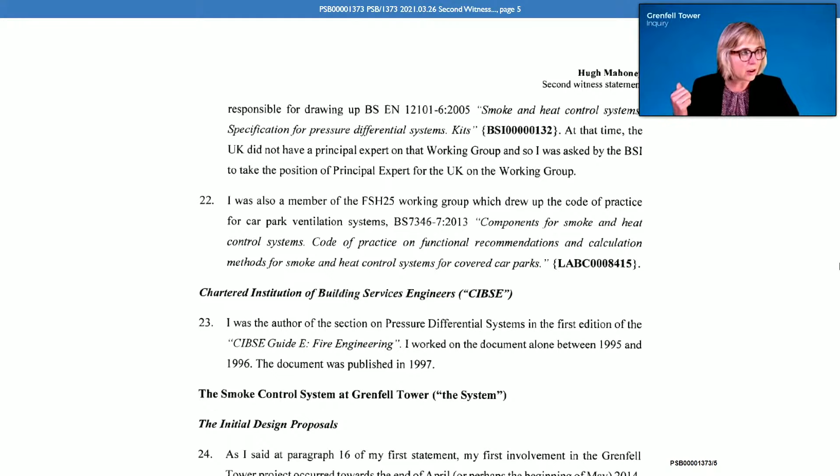Were you also familiar with the practical guidance set out in Approved Document B on fire safety, insofar as that was relevant to smoke control? Yes. Thank you. Now, if we go to paragraph 9 of this second witness statement, this is on page 2, you tell us a little bit more about the Smoke Control Association.

You tell us that the Smoke Control Association was established in 1987. It's part of the Federation of Environmental Trade Associations. It was originally called the Smoke Ventilation Association. The SCA has members from a range of organisations involved in the manufacture, design, supply and fitting of smoke control systems and equipment. The organisation is run via several committees, each carrying out a specific function.

And is it right that you were part of the SCA from 1992 until you began your employment with Colt in March 2016? That's correct. And as a trade association, is it correct that the Smoke Control Association is effectively a group run by the industry, bringing together those with experience in smoke control systems from the industry? That's correct.

And you also tell us that you were chairman of that Smoke Control Association from 1998 to 2000, and you continued to have an active role after that. To what extent did your work as chairman relate to the design of smoke control systems for residential high-rise buildings? That came later. So when did that work with the Smoke Control Association begin? I can't remember exactly, probably about 2009, somewhere around there.

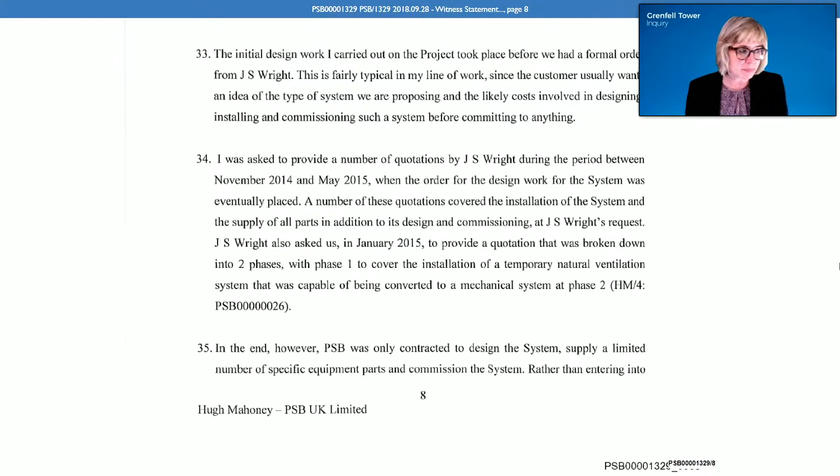You say this, you say, in the end, however, PSB was only contracted to design the system, supply a limited number of specific equipment parts and commission the system, rather than entering into one overall subcontract. J.S. Wright ended up placing a series of separate orders, starting with the order to carry out the design work that was placed in May 2015. PSB was not contracted to install the system. I understand that the installation was instead carried out by a company called RJ Electrics, which is a subcontractor of J.S. Wright. And we were not, in the end, asked to perform our works in phases.

So that's the explanation you give as to how you ended up being asked to carry out the design work, yes? Yeah, but that design work actually is the expansion of the design written down in the performance specification to a working system, not design as in what you think it means.

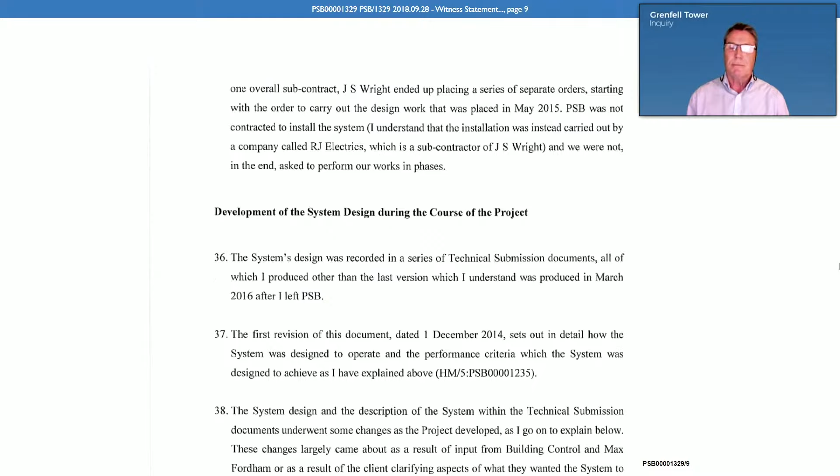Well, I don't know whether you know what's in my head, Mr. Mahoney, but what do you think I think it means, the design work? You're starting at the very beginning with a blank piece of paper and designing a system. I see. So you're saying you didn't do that. It is what you're saying, that you took the design intent that was set out by Max Fordham in the employer's requirements and develop that design?

I'll go back to a statement I made earlier. The design that we had proposed was not carried forward. What happened was that Max Fordham reviewed the information that we provided them with to say you couldn't install a compliant system. It was impossible. That therefore, in order to find a solution which adhered to the spirit of the guidances, not compliant, we put forward a suggestion of a system. That was not taken up. What they then did was to take the volumetric flow rate that we had specified and put it forward as an improvement to the existing system. And that was how the project went forward.

It was on developing an improvement, not a design. And they did a document that they sent through for approval by Building Control, who approved the betterment. Right, I see. Well, look, we're going to come to the specific documents that you prepared in due course, but I think I understand your answer at this stage.

Just going back to what you said in that paragraph that I just read out about the fact that it was a company called RJ Electrics that would be installing the system. In your experience, was it typical that PSB would be asked to design but not install a smoke control system? Not typical, but not uncommon.

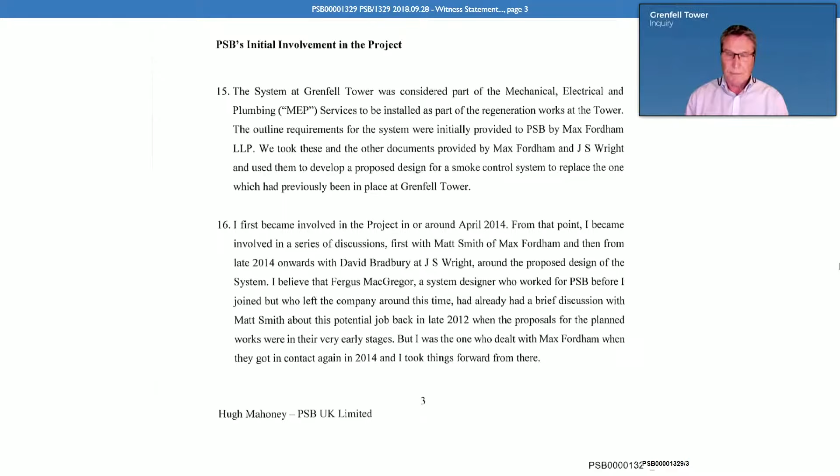Can you explain why the project was assigned to you rather than Mr. MacGregor from 2014 onwards? On the day of the phone call, Mr. MacGregor was not in the office and I took the phone call. I see. So simply because you'd taken the call in 2014, you then carried on with the dealings with it, yes?

Yeah. Were you provided with any update from Mr. MacGregor or Max Fordham about the previous discussions that they'd had about the project? An update. Yes. Did you, when you got off the phone to Max Fordham, speak to Mr. MacGregor and say, what have you already been discussing with them previously? Yes, when he was next in the office, we got together and I asked him to go through with me what he'd been talking about.

And at that stage, it was just, again, another telephone conversation with information taken down over the phone and no real detail. Is it right to say that the previous discussions between Mr. MacGregor and Max Fordham had been more than just a brief discussion about a potential job, and involved some preliminary design advice being provided by Mr. MacGregor? Not directly, no. It was a case of he had a phone call.

He was told how many floors there were, and he was asked what kind of system could be put forward. He was told what was already there. So he decided push-pull was a better solution because of the extended travel distances within the lobby area, and decided that was the best system put forward. But he was not given the employer's requirements at that stage, which added the restrictions that meant you couldn't use that system. I see. Well, let's just look at an email from Mr. MacGregor.

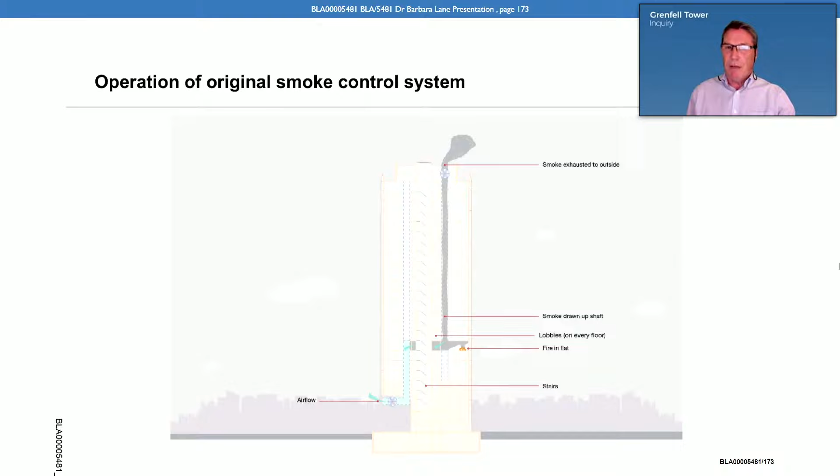And is it right that the primary intention was that it would be drawn up naturally, but that there was a fan that could be used by the fire brigade as a boost to mechanically support that movement of smoke, yes? Yes, as we understood it, it was a natural ventilation system with no fans operating when the detection went off. When the fire brigade arrived at its point of intervention, they had the facility to turn a manual switch that would bring a fan into operation if they deemed it necessary. Yes, thank you, that's helpful.

Did you know how old the existing system was in the tower? We were told it was an early 70s built building. So you assume the system was also early 70s, yes? Yes, because the actual shafts were part of the construction of the building. And was that system working when you first visited the tower? No. So you weren't able to see it in operation in any way? No.

Did you ever consider whether the existing system was compliant with the standards in force at the time it was installed? No. Did you ever ask yourself what the original requirements might have been for that system? Yes. And what conclusion did you draw? Well, it was very difficult because I've never seen anything that small that was compliant with any standard.

So to me, it was some hybrid design that someone had carried out, and there was no detail of it. There was no information available on file anywhere, as far as I can gather, because we did ask the question, and no one was able to trace the design aspect of that particular system of what it was supposed to fulfill, because in modern standards, it wouldn't fulfill anything.

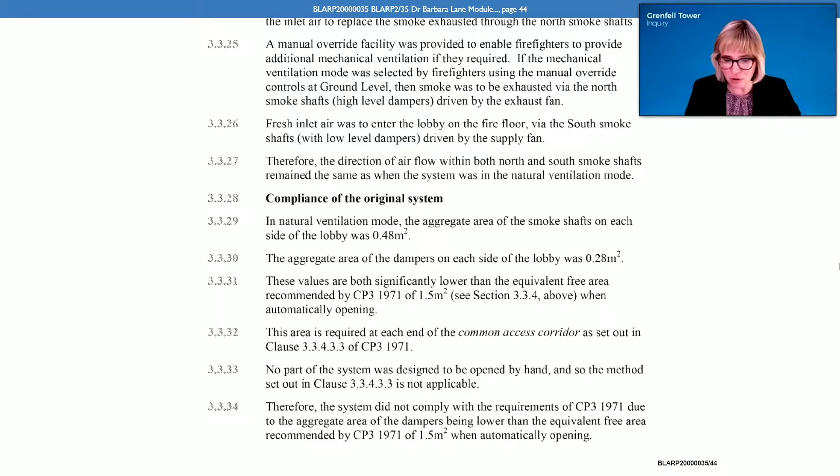Did you ever ask yourself what level of performance the existing system would have if working properly? I took a view on that - the most efficient aspect would be with the fan operating, pulling. It was obvious from the construction, being a bifurcated fan, it would have limited volumetric flow rate. Given the diameter of the fan and the size of the ducts, you could evaluate fairly accurately the likely volume flow rate. Did you produce any written analysis of what the existing system was capable of? No, that wasn't in my brief.

Would the existing system have provided protection to the stair when working properly? No. Why? Because there wouldn't be sufficient ventilation rate. Would it have provided protection within the lobby it activated on? No. So you thought it wouldn't provide any protection to the stair or lobby? I wouldn't say any, it wouldn't provide satisfactory protection. Which of those two was it intended to protect? I would say the lobby.

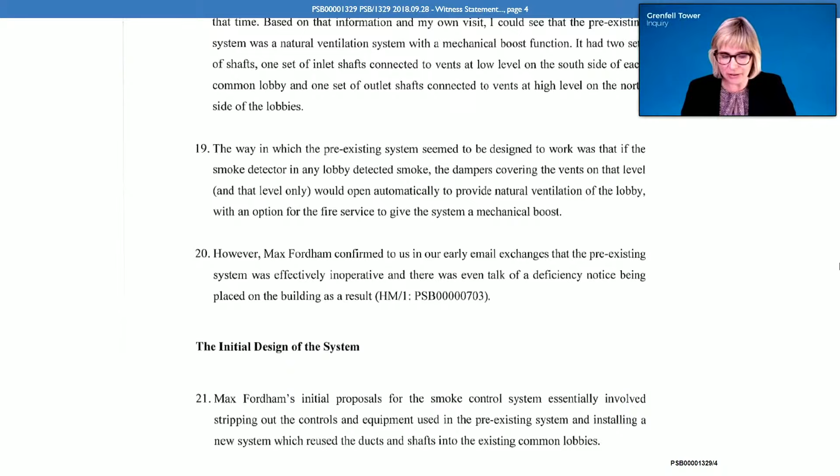Was PSB ever sent a copy of that deficiency notice? No, because we weren't involved in the project. Did the fact of that deficiency notice affect the advice PSB gave about the design of the system in any way? No. Were you aware there had been a fire at Grenfell Tower in April 2010 in which the existing smoke control automatic opening vents had failed to operate? No. So you were never aware smoke had leaked from the extraction shafts into other floors? No. Had you known that, would it have affected the design advice you gave about improving the existing system? Only in so much as to tell them they should have been maintaining it and making sure it operated correctly. Other than that, no.

Now, stepping back and thinking about the regulatory requirements which apply to the design of the refurbished smoke control system at Grenfell Tower, can you explain which of the functional requirements in Schedule 1 of the building regulations you considered when designing the system?

I don't think there's a straight answer to this. As I've already said, you could not put forward any system that would comply with any of the guidance. It was impossible, so there was no system type you could put in there. So therefore, we as designers looked at it from a different direction and said, well, the spirit of the standard is to protect the stair. Can we come up with an alternative design that will protect the stair that doesn't comply with anything? That was our starting point.

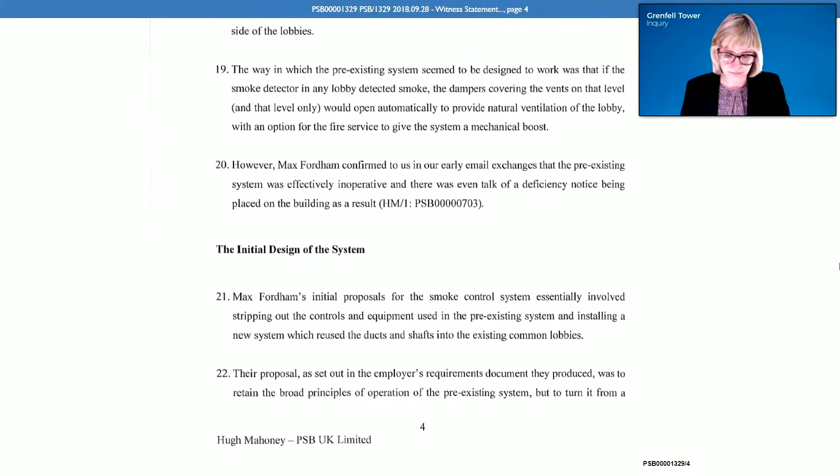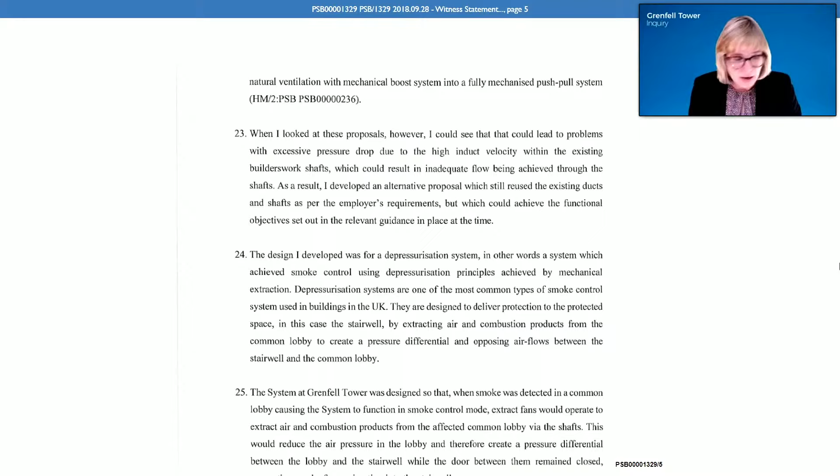And you say their proposal, as set out in their employer's requirements document, was to retain the broad principles of operation of the pre-existing system, but to turn it from a natural ventilation with mechanical boost system into a fully mechanized push-pull system. We've already discussed what those two concepts meant—natural ventilation with mechanical boost. Just to be clear, what do you mean by a fully mechanized push-pull system? When it operated automatically.

So you'd still be having inlet air through the south shaft and up into the lobby and extract coming out through the north, but this time with mechanical assistance from the outset? Yes, and it would operate automatically on detection rather than manually by the fire brigade. Yes, I understand. Now, if we can go to paragraph 27 of your second witness statement on page 5.

You say this: the push-pull system proposed by Max Fordham is a type of smoke control system usually employed when the travel distance in the escape corridor leading to the stairwell is greater than that specified in ADB or BS 9991. Such systems are designed to provide smoke dilution on the escape route, reducing the levels of smoke toxicity and visibility to acceptable levels. This is achieved by introducing clean, fresh air through a mechanical inlet air shaft at low level, local to the stair door within the corridor. An extract shaft is located at the furthest end of the corridor, extracting diluted air smoke at a volumetric rate equivalent to the fresh air inlet.

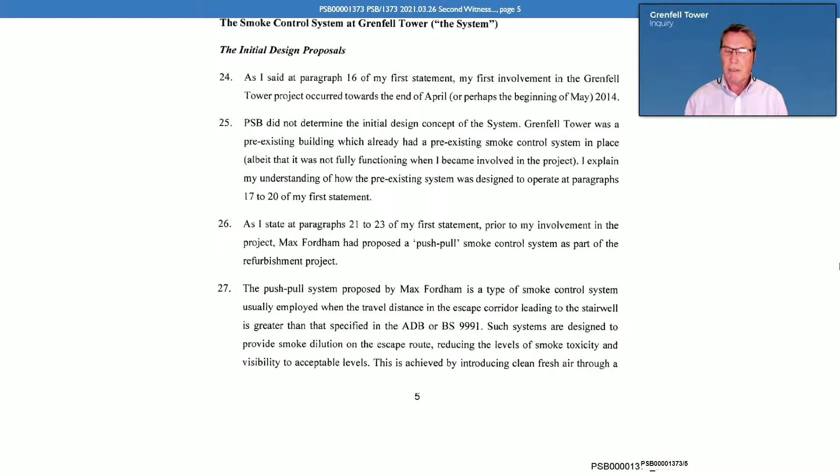Were you aware that the maximum travel distance in the lobbies at Grenfell Tower exceeded the 7.5 metre threshold for an extended travel distance specified in Approved Document B on fire safety? By measuring 9.5, yes. And we've seen this before with another witness, but just for the transcript, table 1 of Approved Document B makes clear that the maximum travel distance in common areas of blocks of flats is 7.5 metres. And can we also agree that the maximum travel distance in BS 9991, which you mentioned in your statement, is also 7.5 metres. And after that, it's considered to be an extended travel distance.

Correct. Let's just briefly look at that. It's BSI00000621. Yes, this is BS 9991 2011, Fire Safety in the Design, Management and Use of Residential Buildings, Code of Practice. And if we look at figure 6 on page 36, and at the bottom, you can see the 7.5 metres is shown in that bottom diagram. Do you see that? Yes.

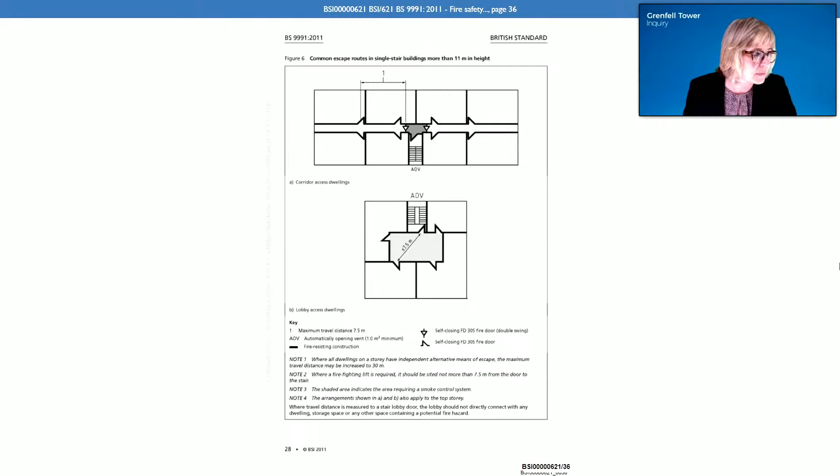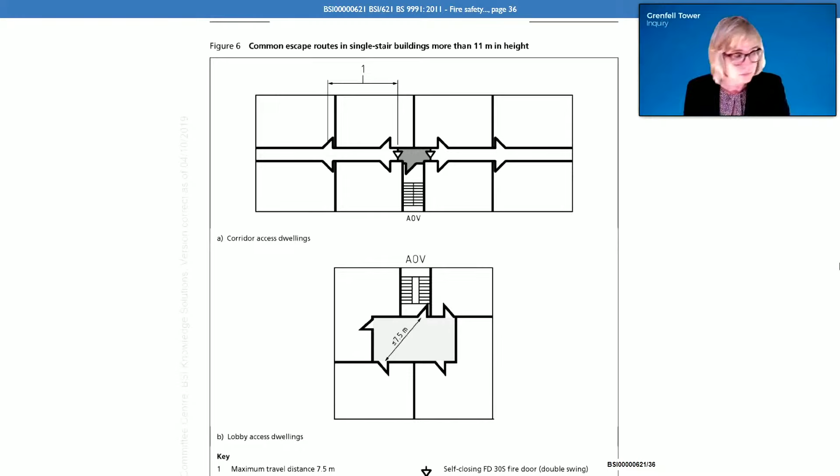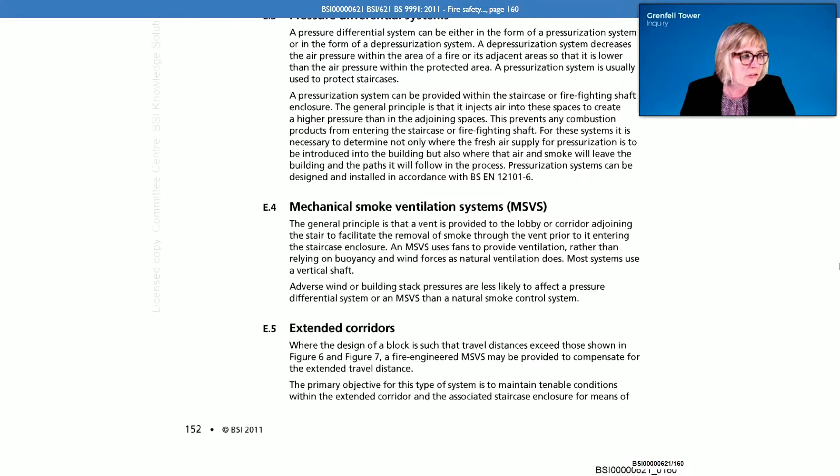And it makes clear, for example, if we look at page 160, right at the bottom of that page under extended corridors, it says where the design of a block is such that the travel distances exceed those shown in figure 6 and figure 7, a fire engineered mechanical smoke ventilation system, MSVS, may be provided to compensate for the extended travel distance. The primary objective for this type of system is to maintain tenable conditions within the extended corridor and the associated staircase enclosure for means of escape purposes. And then information about tenability criteria can be found, and it gives the reference.

So for the purposes of BS 9991, anything above 7.5 metres is extended, and that guidance we can see is provided about needing to maintain tenable conditions in the corridor and the stairs.

Now, just to be clear, the BRE in their report following their survey at the tower, measured the same distance at 9.3, so slightly less than that. And you've said you thought it was around 9.5 at the worst part, is that right? Correct. But whether it's 9.3, 9.5 or 10.3, that was an extended travel distance, wasn't it, compared with the 7.5 maximum in ADB and BS 9991?

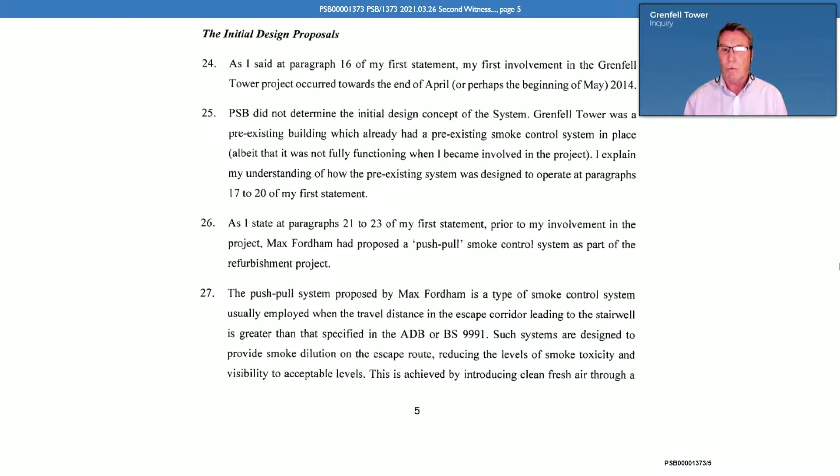I see. So you're saying you were fully aware that there were extended travel distances at the time you were carrying out your design work, yes? That's correct. Thank you. Now, if we go to paragraph 23 of your first witness statement now, page 5.

Now, in this paragraph and some that follow, you are explaining your concerns about the Max Fordham proposal for a push-pull system. You say, when I looked at these proposals, I could see that could lead to problems with excessive pressure drop due to the high in-duct velocity within the existing builder's work shafts, which could result in inadequate flow being achieved through the shafts. As a result, I developed an alternative proposal which still reused the existing ducts and shafts as per the employer's requirements, but which could achieve the functional objectives set out in the relevant guidance in place at the time.

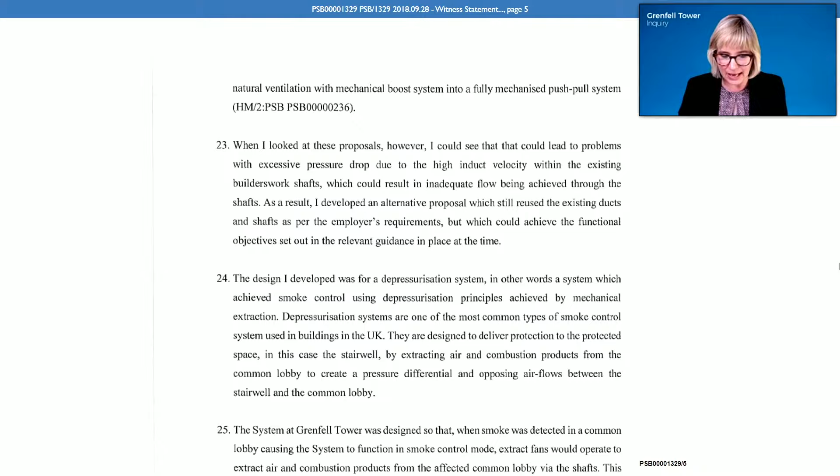Now just taking that explanation in stages, firstly, can you explain to us why would air entering the existing builder's shafts potentially quickly result in an excessive drop in pressure? Not drop, an increase.

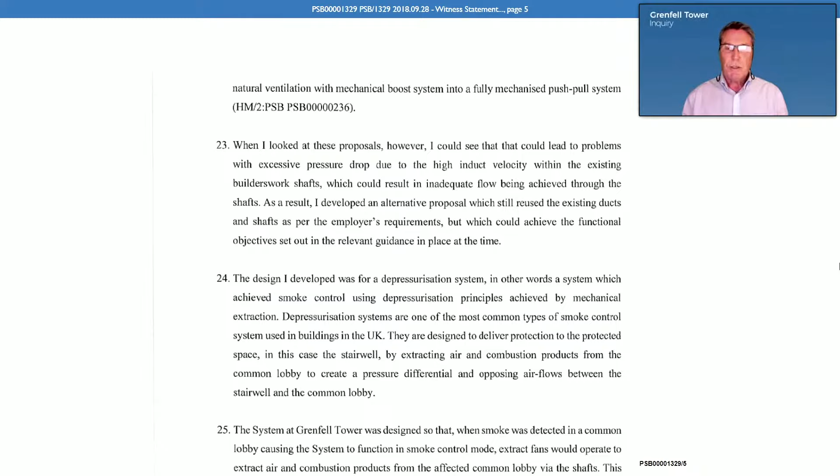Can you explain your concern then? It's a bit like the old quart into a pint pot. You're trying to push too much air through a small hole, and it would lead to large pressure drops within the system, which are difficult to keep a balance of. In addition, the wall openings into the lobby would have velocity jets somewhere in the region of 20 to 25 meters a second, which if there was a fire in an apartment in, say, the south end of the building, then when the fire brigade were fighting a fire, that jet would probably push smoke into the stairwell. So we could not maintain the stairwell clear of smoke. The push-pull system was just impossible to put into work in situ because of the restrictions of size.

Yes, I see. So just to be absolutely clear, you say, first of all, it's a bit like the old quart into a pint pot. You're trying to push too much air through a small hole, and it would lead to large pressure drops within the system, which are difficult to keep a balance of. Can you just explain how that process occurs?

Well, as you're trying to force a large volume of air through a small duct, it just increases the pressure drop within that shaft. All performance characteristics for ventilation in ducts is based upon laminar flow, not turbulent flow, and on reasonable velocities, not high velocities. These would be high velocities. That would lead to excess pressure differentials, pressure drops, beyond what we would normally work to. We would normally work about 8 meters a second in duct maximum velocity, and this was far in excess of that. But the velocity jetting through the wall opening was also a problem. That would also create a big pressure.

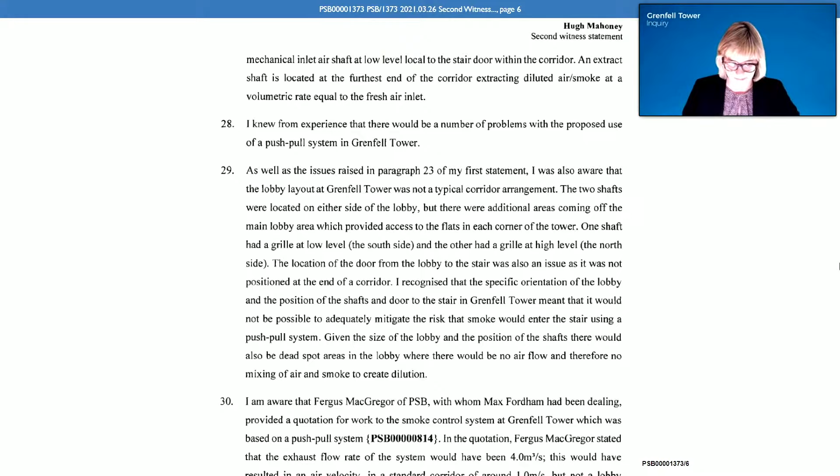Mm-hmm. It's one of your concerns that with a push-pull system, where the smoke is going across that lobby, that might not mitigate the risk that smoke would enter the stair, yes? Yes. And you've also expressed concern that there might be dead spots in the system at the branches of the lobby where there would be no airflow.

The principle of a push-pull system is usually air flowing through a straight tube, i.e. a corridor. It travels through that straight tube with a velocity, and it mixes air with smoke as it travels, and it reduces the level of toxicity and obscuration within that corridor because it's mixing and pulling out.

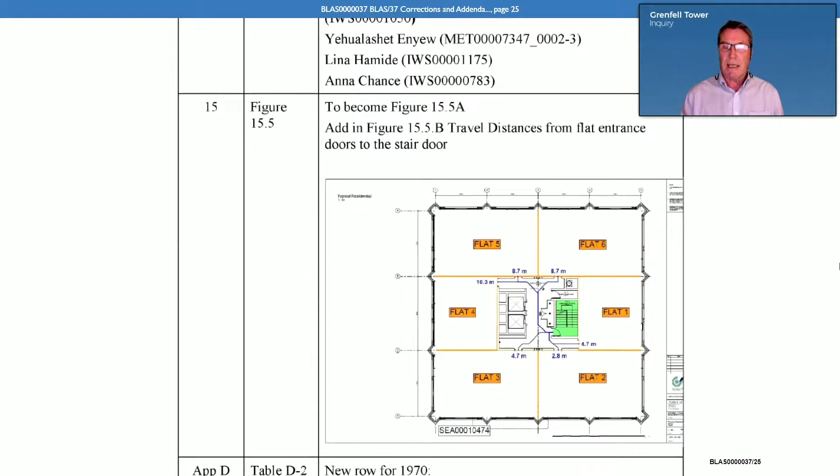The main concern I had throughout any of the system types was the size of the shafts. But are you talking specifically about push-pull? Yes. Is it fair to say those are the main concerns? They are the main concerns. One, we couldn't guarantee not contaminating the stair. We could not guarantee that. And we could not use a push-pull system in the normal sense, i.e. a straight corridor. Yes, I understand.

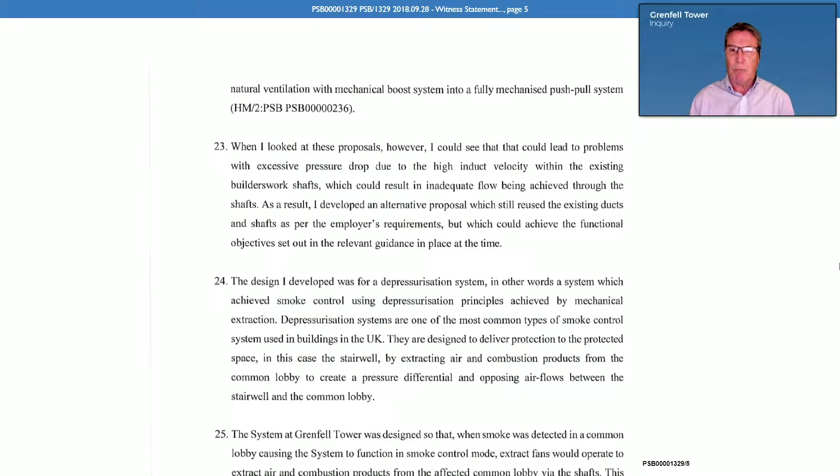And just to be absolutely clear about what you thought those functional objectives were. So in terms of the stair, what were your functional objectives? To keep it relatively clear of smoke. When you say relatively clear of smoke, that's the wording from the standards. Which standards are you referring to there? I think that's in BS 9991 and ADB. So you're keeping the stair relatively clear of smoke.

What about the lobby? To put ventilation in there that will deal with some smoke which may enter the lobby when people are escaping from their flat, from the fire apartment, sorry. And again, where are you getting that requirement from, some smoke which may enter the lobby? 2.25 of ADB.

2.25 of ADB, yes. And did it include protection of the stair for firefighting operations? Yes, I've already said that. And protection of the lobby for firefighting operations? Yes.

Were those functional objectives - so what you've just said, that we're trying to keep the stair relatively clear of smoke, etc. - were those functional objectives ever set out by you or anyone else at PSB in a document? No, it wasn't necessary, as I said before, because the project didn't go ahead based on the design. It went forward on the betterment on the ventilation rate.

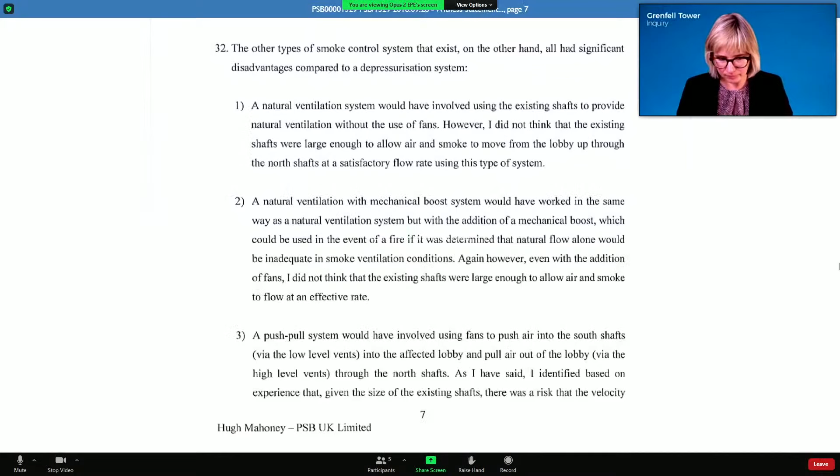Now, if we go to paragraph 32 of your first statement, page 7. In this part of your statement, you've listed a number of different types of smoke control system that can be installed in high-rise buildings. Just to quickly run through them, there's the natural ventilation system, which we've discussed.

Yes. And is it right that the main problem with Grenfell Tower was the size of the shafts, which were not large enough to achieve a high enough airflow rate? That's correct. Did you ever do a calculation to confirm that? To confirm what? The size? To confirm that the shafts were not large enough to achieve a high enough airflow rate with a natural ventilation system. Did you ever do a calculation?

It doesn't have a calculation. It's based on a size, a dimension, cross-sectional area, 1.5 square metre shaft. It's not based on a calculation. I see. So if you went to prove that system on the day of commissioning, for example, you wouldn't measure the shaft. You wouldn't do a calculation.

Right. And then we have a natural ventilation with mechanical boost. Again, we've discussed that before. Yes.

You say at paragraph 32.2, in the last sentence, however, even with the addition of fans, I did not think that the existing shafts were large enough to allow air and smoke to flow at an effective rate. Yes? Yes. What do you mean by an effective rate of airflow? To meet the design requirement.

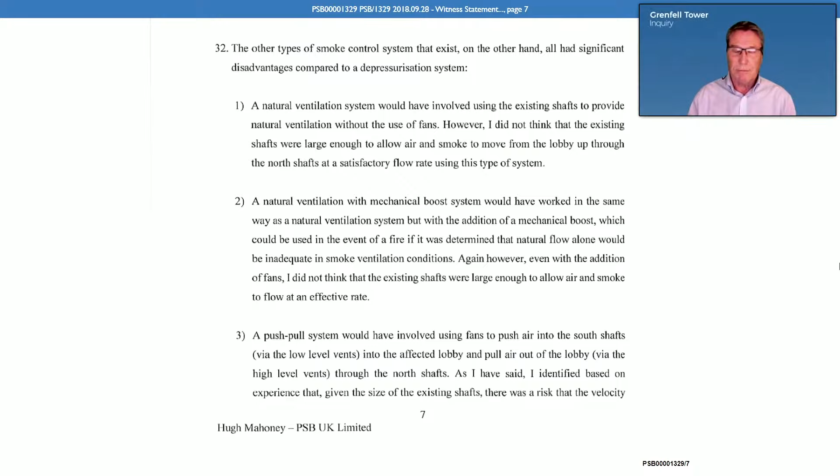And then there's the push-pull system, which we've already discussed, and you've explained your concerns about that. Yes. And then going over the page, you talk about a pressurization system, which is another type of mechanical smoke control system. A pressurization system, is this right, would use fans to move air into the stairwell itself, creating higher pressure in the stairwell, preventing smoke moving into the stairwell.

Is that right? Yes. And was the main problem with that, in your view, that it would require the stair to be well sealed so that this positive pressure was maintained? No. A pressure differential system to BS EN 12101-6 is very express in its requirements and layout, and it is impossible to install that compliance system within Grenfell Tower, or for that matter, any high-rise block of flats. You simply can't do it.

Yes, I understand that, but it's right, isn't it, that British standard refers to two types of pressure differential system, and one of them is pressurization of the stairs? Yes and no, it's far more detailed than that. You pressurize the stair, you pressurize the firefighting lobby, and you pressurize the firefighting lift, and you must have an exhaust path within each dwelling.

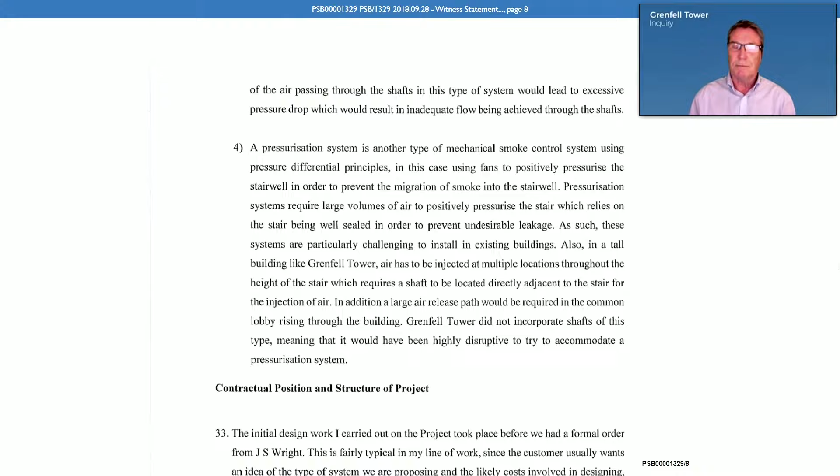Yes, I see. If we go to an email, PSB 6025, there's an email from Mr. MacGregor to you on the 2nd of May 2014.

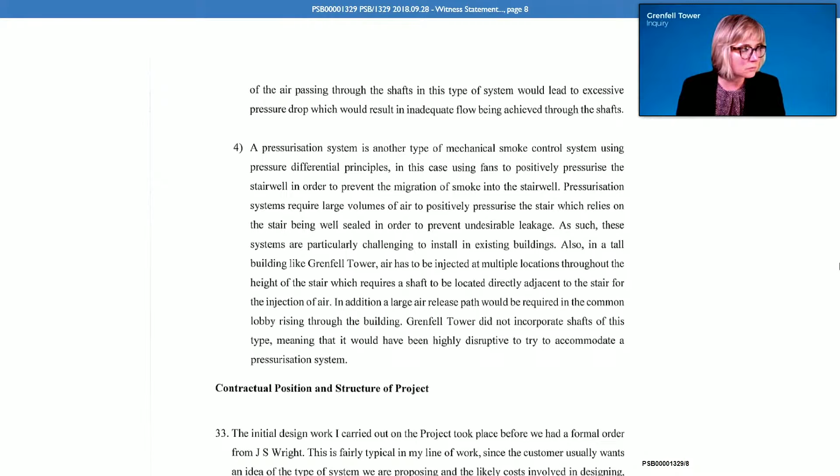He says in the first paragraph of this email, 'Hugh, this is one I looked at some time ago, and we discounted changing the system to a pressurization system as it would be much too difficult. Getting the ducts in, leakage paths would be a nightmare.' Do you recall this email? Yes. And can you help us, what pressurization system had you discounted at that stage as being too difficult?

Any pressurization system. So when he says getting the ducts in, leakage paths would be a nightmare, what specifically is he referring to in terms of getting ducts in and leakage paths? To comply with the requirements of that standard, you would have to put a large air delivery duct to serve the stair, which no slab openings are available for. You'd have to put a very large duct in to deliver the air to the lobbies, and there was no openings in the slabs to accommodate that. You'd also have to have a much smaller duct, but a duct nonetheless running through the height of the building for the firefighting lift, and the openings for that didn't exist.

And in every flat, because you didn't have two opposing walls to put automatic opening window vents in, which I'm sure the tenants wouldn't have wanted anyway, you'd have had to put a very large 1.6 square metre minimum cross-sectional area duct in every flat running through the building. So if they've got 6 flats per floor, that's 6 very large ducts running through the height of the building. They just did not exist, so therefore you couldn't put it in.

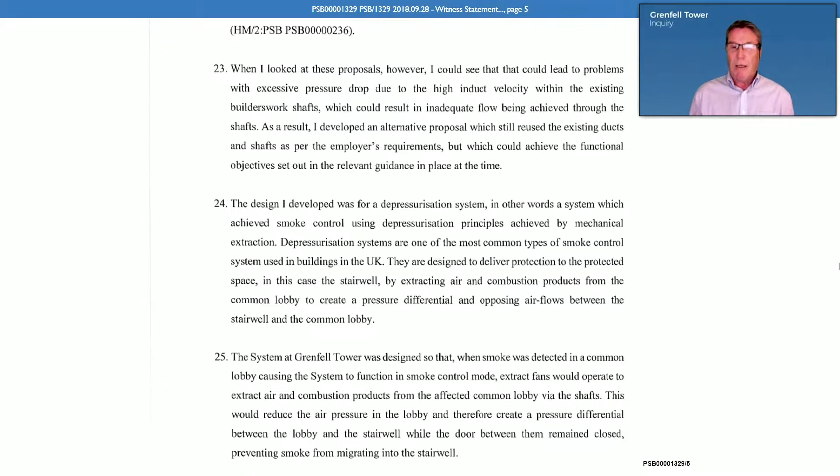As it says in Approved Document B, that's a natural occurrence because people are evacuating a flat that's on fire and some smoke may come with them. So that's why you ventilate the lobby, because some smoke may come. The smoke is already in the lobby.

What we then have to do is stop it getting into the stair. Now, if we look at your second witness statement at page 7, starting at paragraph 34, you describe the system as a mechanical extract depressurization system, which principally works by extracting air and smoke from the lobby so that when the door between the lobby and the stairwell is opened, an airflow is created from the stair to the lobby, which limits smoke ingress into the stair. That's correct. So is it right that the primary purpose of the system is not to extract the smoke from the lobby, but to create an airflow between the stair and the lobby when the stair door is opened?

I'll say it again, it's not a smoke extract system. It's a smoke control system.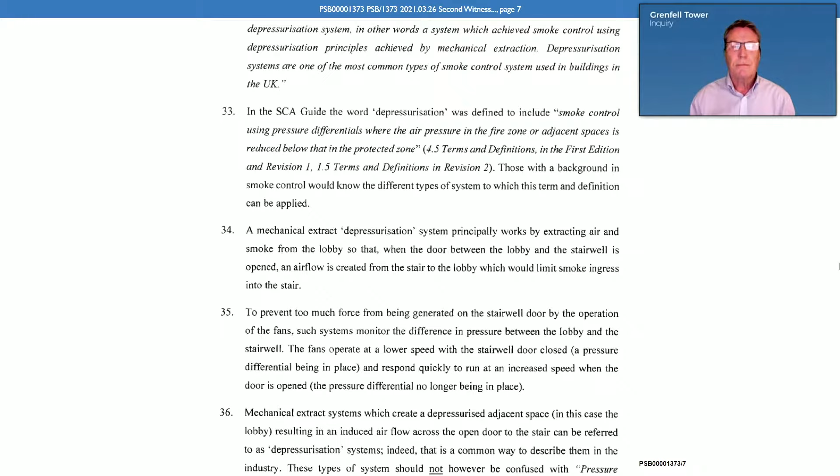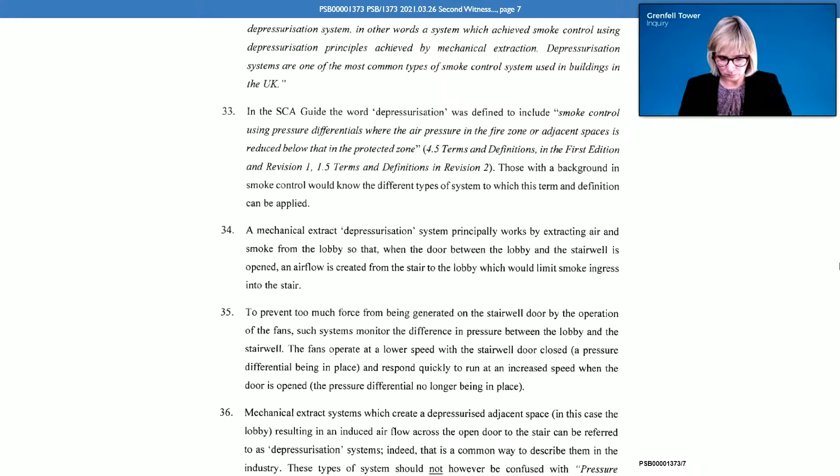Thank you. Now there's a helpful illustration of this in Dr. Lane's Phase 2 report. If we could go to BLARP2/35 at page 260, and blow up that diagram. Here, what Dr. Lane has done in simple terms is tried to translate the design intent of the PSB system into this diagrammatic form, in simple terms, yes?

This is a later design. Which design are we talking about? Originally, everything was extracted from the top of the building. The two shafts were joined together in the rooftop plant room with one extract fan set. Yes, this is a much later development. I see, so I think this is the design as it was finally intended to be. Is that correct? That's correct, but it's not our design.

When you say it's not your design, why do you say that? Our design was to connect two shafts together, the south and north side, in the rooftop plant room with a single fan set. The design evolved through the course of the contract by other parties. So are you saying it wasn't part of your design intent for the smoke to be extracted downwards, as we can see on the bottom left-hand side of that drawing?

Initially, no. But did it become part of your design that it was extracting downwards? We can see the smoke path through the ductwork at the lower levels and then out to the outside. It became incorporated by the instruction of others.

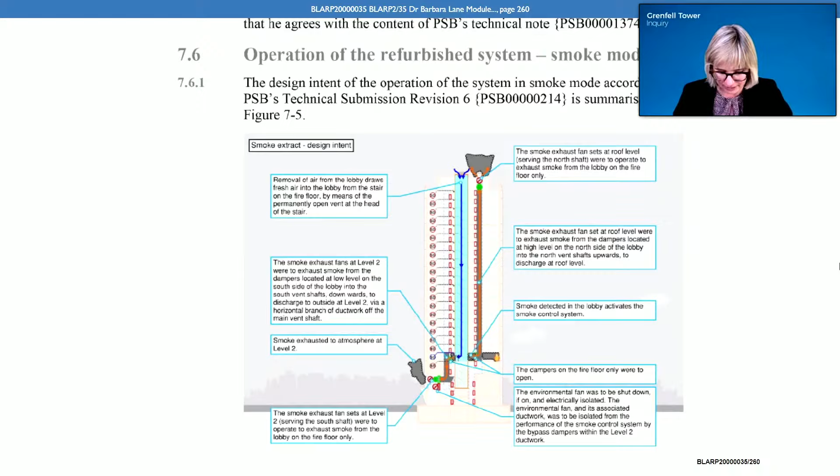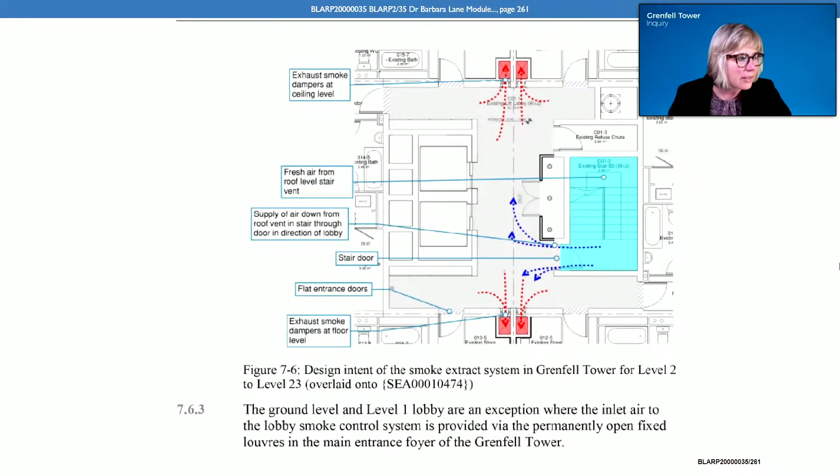Now we've got a diagram showing on a floor plan how this was intended to work. If we can go to BLARP2/35 at 261. Again, just in simple terms, what Dr. Lane has done here is give an indication of how the final design was intended to work. Can you just explain for the panel what we can see here? First of all, we can see some red arrows extracting at south and north. Is that correct? That's correct. And so what was the intention of exhausting smoke at both sides?

This particular diagram shows the firefighting phase, not the means of escape phase.

The design proposal was that in extracting air from all 4 shafts, we would create a velocity across that open door that would stop any smoke that was in the lobby at that stage entering the stair. And then once the fire door was actually open for the fire brigade to fight the fire, it would still keep the stair reasonably clear of smoke, even with that fire door open and, in fact, a broken window in a fire flat.

Yes, so let's just take this in stages. Assume wasn't the main design intent or design condition for the flat door to be shut? That's not what's shown in that diagram. Well, where are you seeing the flat door open? It shows all the doors are open. Okay, well, assume for the moment that all the doors around the lobby are closed, yes?

Right. Was the primary design of the system to ensure that if the stair door was opened, there would be a velocity across that stair door of 2 meters per second, which would keep any smoke that had entered the lobby out of the stair. Is that correct? That is correct. But the main criteria is extracting 3 cubic meters a second.

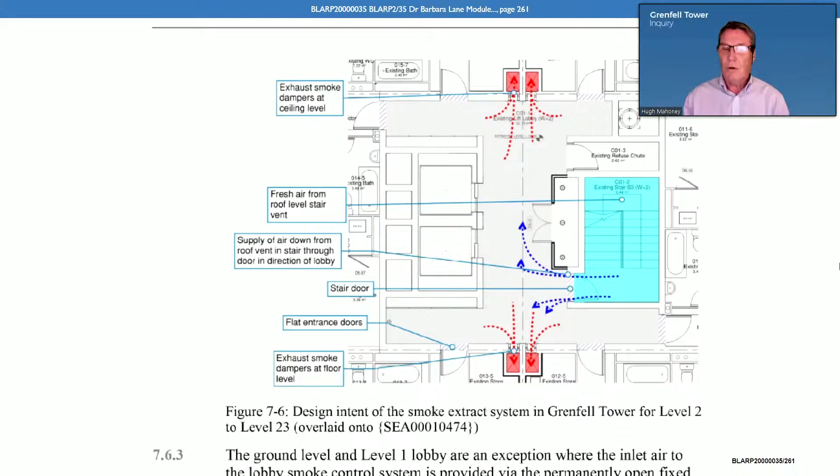No, there was no instruction ever issued to carry out a CFD model. Yes.

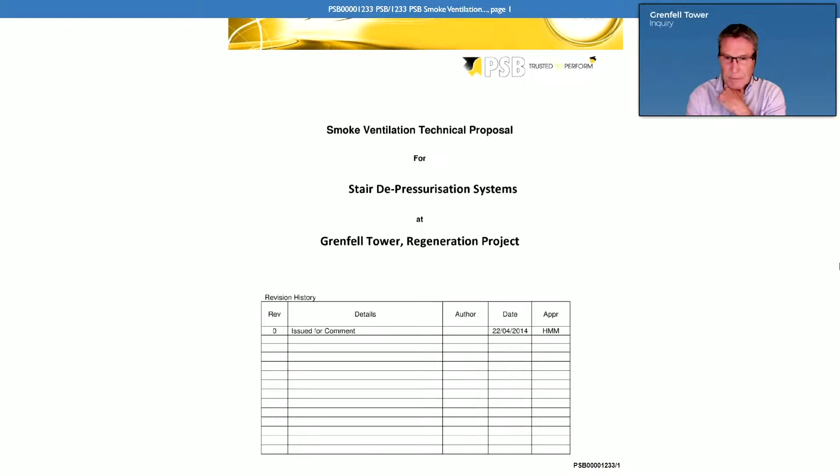Now, let's look in more detail at the actual proposals that PSB put forward. If we can go to the initial technical proposal, PSB/1233, we can see it's the smoke ventilation technical proposal, issued for comment 22nd of April 2014, and approved HMM. Is that you? That's me. Were you the author of this document? Yes. Is it correct this proposal was produced before PSB had been formally engaged to do anything on the project? Yes. To your knowledge, was this document ever provided to building control?

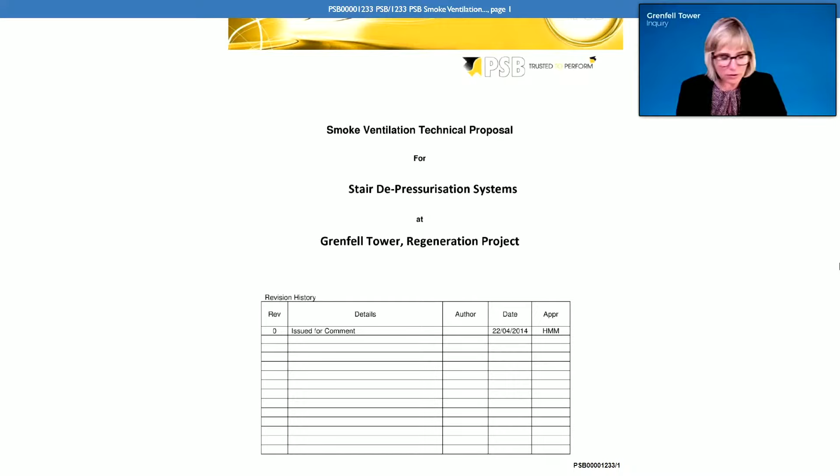No, it wasn't. If we look at section 1, the introduction on page 2, I want to read the first 2 paragraphs. It says: having identified possible problems with the proposed push-pull system leading to excessive pressure drop due to the high induct velocity within the existing builder's work shafts, an alternative smoke control design solution is required. And then you say, after discussions, this report provides an alternative approach to designing a lobby smoke control system.

Just to be clear, when you wrote this, what did you mean by an alternative smoke control solution or an alternative approach? Well, it was following discussions with Matt Smith at Max Fordham, where we pointed out it was impossible to put an appropriate system in that met all the standards and could be said to be compliant. Therefore, what we were proposing was to put forward a design that would protect the stair and ventilate the lobby, but it didn't follow any of the guidance. So it's an alternative approach.

Thank you. Looking at the 3rd and 4th paragraphs, you say these proposals will have to be firmed up and then submitted to the Building Control Authority for discussion and agreement as an acceptable alternative to the originally proposed push-pull system. That's correct. You go on: the proposal is to design a depressurization system which will protect the stairwell by providing an airflow from the stairwell into the lobby when the stairwell lobby door is opened. Yes, you see that? Just to be clear, it's only talking about protecting the stairwell, isn't it? Yes. It doesn't talk about protecting the lobby. No.

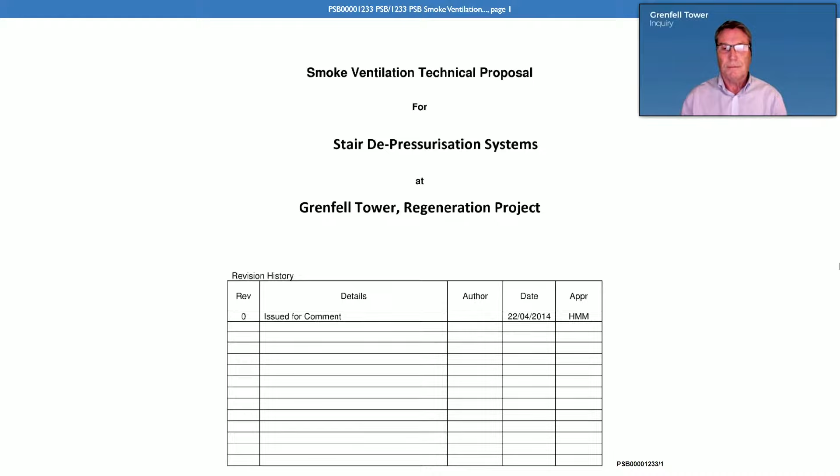When we asked Mr. Hoban about this last week, the building control officer, he understood that it wasn't a depressurization system, but what he called an extract system. That's correct. He says that when there was a meeting about it, it was about an extract system from the lobbies, not a pressurization system. He said the reality of a pressurization system in the existing building would be really quite difficult to do. So it seems it's almost not practical. That wasn't the discussion at all. It was an extract system.

That's correct. So if it was an extract system, why is it not described simply as an extract system in all of these documents? We said mechanical extract to depressurize the lobby. That's what it does. And that's right, isn't it, that as a consequence of extracting air from the lobby, you by definition create a pressure differential between the lobby and the stairs? That's correct.

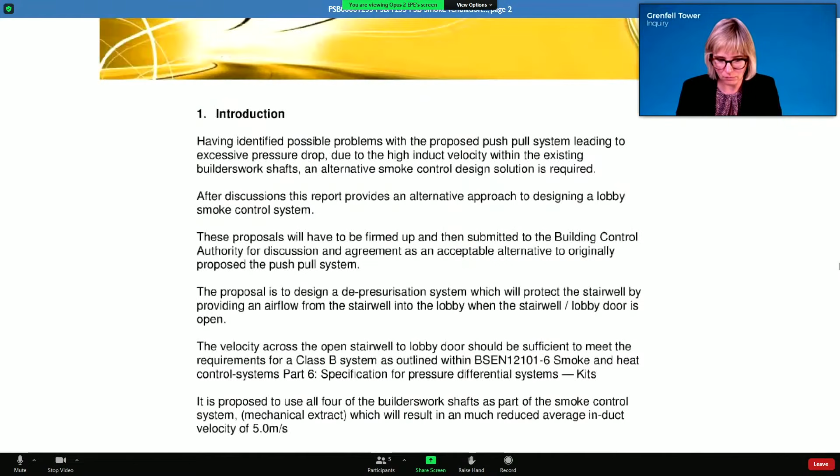Thank you. Now, if we go back to the proposal, page 2, the 5th paragraph down, it says: the velocity across the open stairwell to lobby door should be sufficient to meet the requirements for a Class B system as outlined within BSEN 12101 Part 6, Smoke and Heat Control Systems, Specification for Pressure Differential Systems, kits. You see that? I see that.

Now, can you explain to the panel briefly what is a Class B pressure differential system as outlined in that British standard? A Class B system would pressurize the stair, pressurize the lobby, pressurize the firefighting lift. The stair would be 50 PA above ambient, the lobby 45, and the lift 50 PA, and there would have to be a defined air leakage path out of the fire flat. So air would be pumped into the building in large quantities, then flow through the open door of the stair when the fire brigade were there, through the door of a flat, and out through a smoke shaft or whatever the egress path was to the flat.

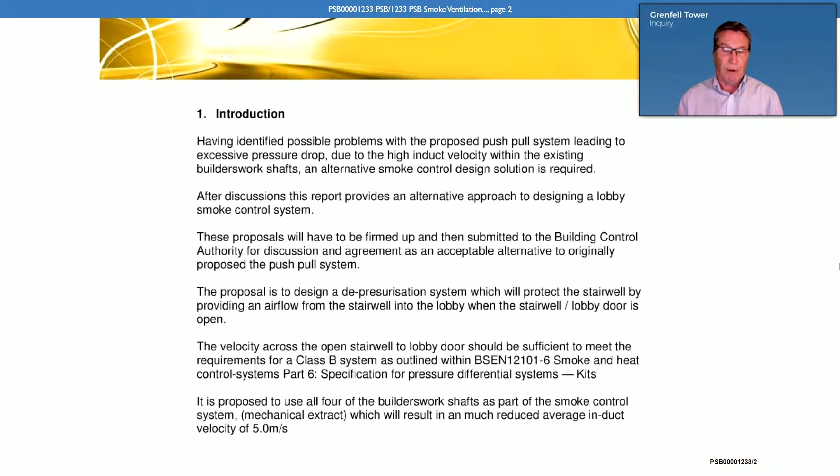Yes, I understand. And it's right, isn't it, that the Class B system is for means of escape and firefighting? That's correct. For a residential building it's a Class A, and the difference is 0.75 metres a second across an open door. Class B does both means of escape and firefighting, so it's got a 2 metre a second open door velocity, and that being greater than 0.75 is the dominant number you would design to.

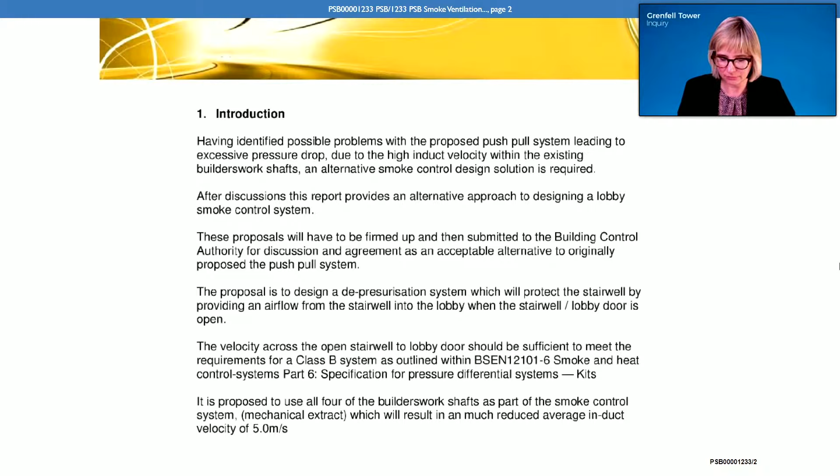Yes, and we can see that if we look briefly at that British Standard. If we go to RBK00045054 at page 17, we get a helpful table setting out the classes of systems. As you've just confirmed, a Class B system is for means of escape and firefighting. That's correct. Class A is for means of escape, defend in place, yes? Yep.

Now, can we take it that you chose the Class B requirement, that velocity requirement, because the system needed to provide protection for both means of escape and during firefighting? No. It was to justify the 3 cubic metres a second extraction rate. Back to the discussion with Max Fordham and partners, when we said how the system would work, they asked what is the ventilation rate? We gave them a ventilation rate, and they said, where does that come from? So we gave that as a benchmark of where it came from.

Why did you choose that as your benchmark from that Class B system? Because that is the ventilation rate we would put in a standard smoke shaft system using mechanical means of exhaust. I see. So is it just a coincidence?

Well, let's go back to your proposal. It can't have been a coincidence that it's also in that British Standard, because you're specifically referring to that British Standard in the proposal, yes? Yes. When the industry developed these systems, that was one of the things we looked at, and that was the ventilation rate required to comply with both firefighting B5 and B1, and also in line with research undertaken by the Building Research Establishment.

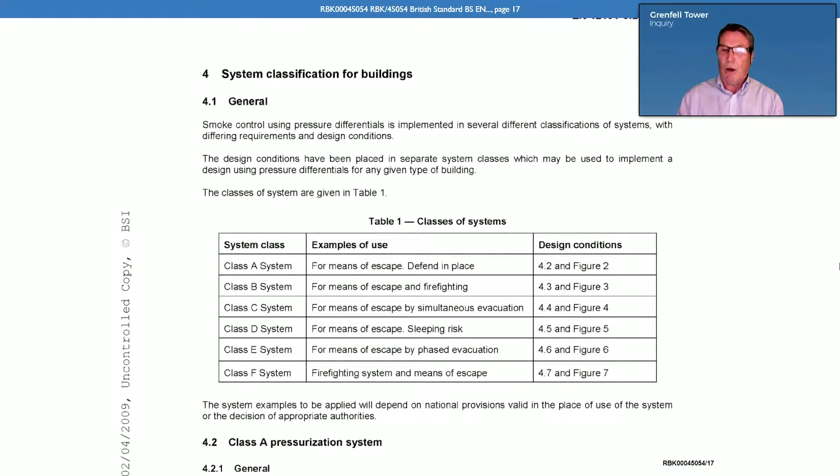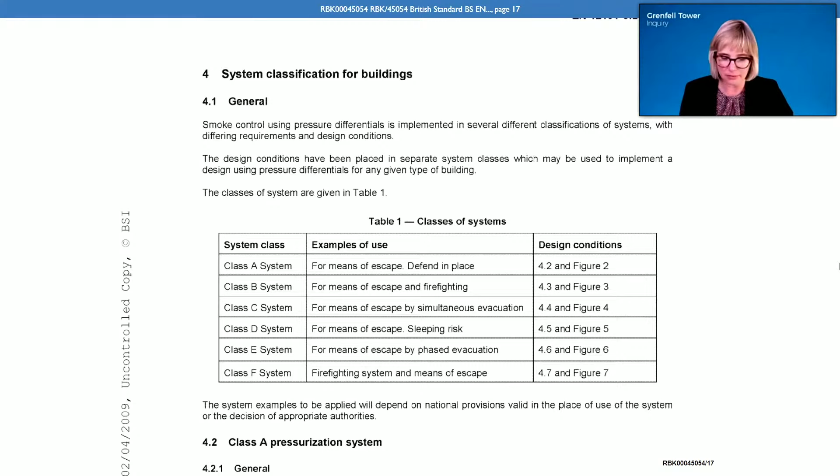And most companies will work on a delivery of 3 cubic metres a second extraction from the lobby as the ventilation rate required to protect the stair. But it came from that requirement of open door velocity. We knew that with that open door velocity, we can protect the stair. So that's where these systems developed from. And just going back to the proposal and the wording we were just looking at: PSB00001233, yes, the velocity across the open stairwell to lobby door should be sufficient to meet the requirements for a Class B system as outlined in that standard.

Where you say should be sufficient to meet that, did you mean that the velocity across the open stairwell door would meet that requirement, or was this just aspirational, hence the use of the word should? It would meet it with just that door open, and if there was a stairwell vent, the stairwell vent open. As in the case of Grenfell, it was a permanent open vent.

So I think what you're saying is, if the stair door was open, but all other doors on the lobby were closed, it would meet that 2 metres per second, yeah? That's correct. If other doors were then open, as in the fire door, it would still protect that stair by extracting 3 cubic meters a second from the lobby.

You don't ever say that second part of what you just said in any of the technical submissions, do you? No, because this is a follow-on from conversations that we'd had. We were just asked at this stage to put some notes together to help Max Fordham, because we pointed out quite clearly this does not comply. And because it doesn't comply, you're going to have to go through to building control and say, is it okay to use this system? Because it's the only thing we can do. And they said, can you put some notes together? Don't go into any real detail at this stage because it may not be acceptable. Just give us some notes that we can discuss with them. And yes, I see, that's what this was.

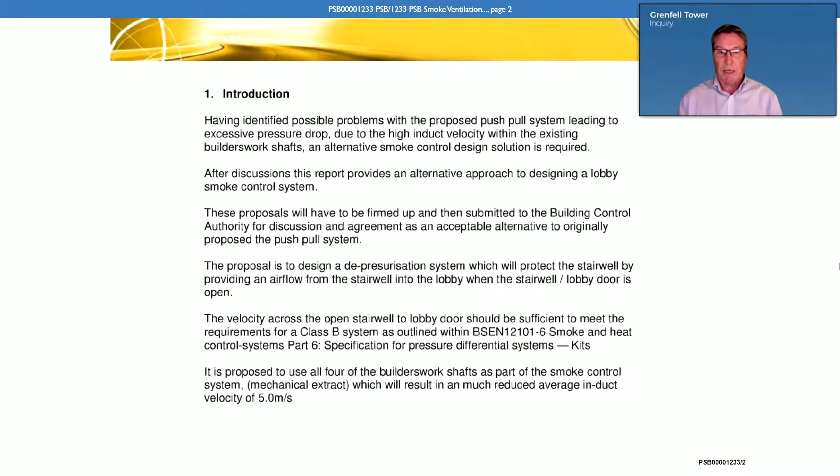I see, so that's the average velocity through each of the 4 different ducts, is that right? As an average, yes. It will not - you can't balance those, so it won't be precise, but yes. And again, you can see there we clearly state it's mechanical extract in that last paragraph.

At this stage, we hadn't gone into any detailed design work. As it says on the other page, it will need to be developed on and detailed work we put into it. So at this stage, we were just saying it's not just 3.2 we need, because to deliver that 3.2, we need a lot more air because we're going to lose it in the system.

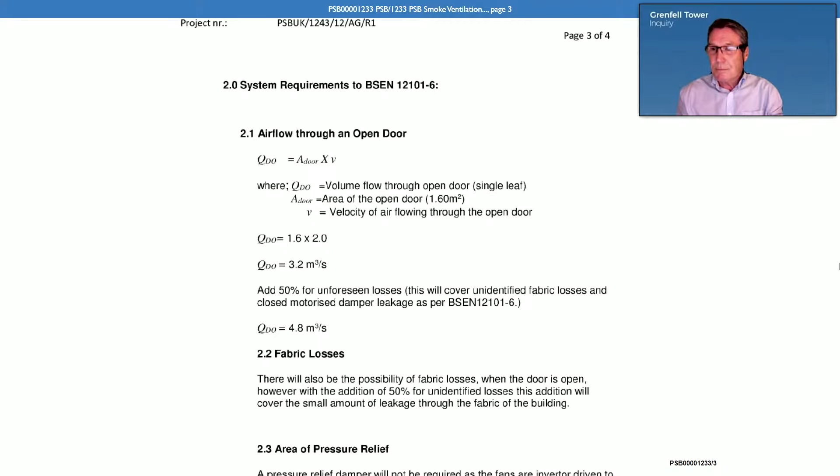Yes, I see. And then you've got a section underneath for fabric losses. I think you're just explaining your 50%. Is that right there? Yes.

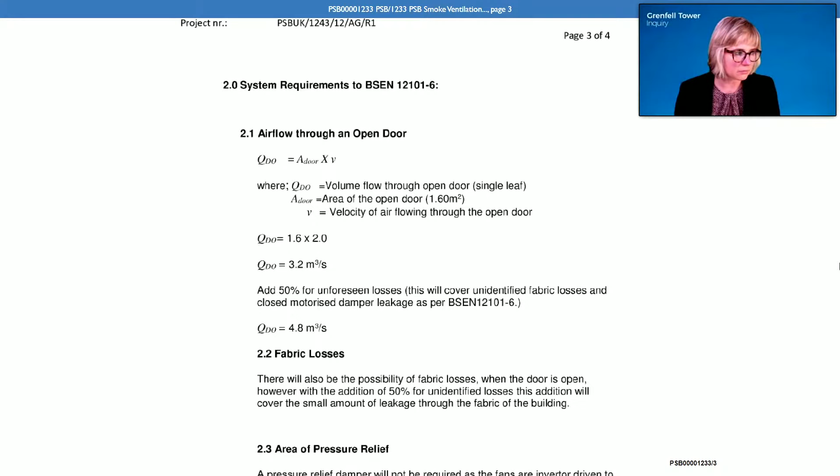And then you've got underneath that area for pressure relief at the bottom of that page. Can you just explain in simple terms? I think what you're saying here is that by extracting the air from the lobby, you will by definition create a force across the closed door to the stair, which would be too great to open the door. And so this is where your fan speed is important, that you need to make sure you've got pressure switches able to ensure the fan is at low speed until the doors are opened. And then when the stair doors opened, the fan goes up to high speed to keep that velocity. Is that right? That's correct, yes.

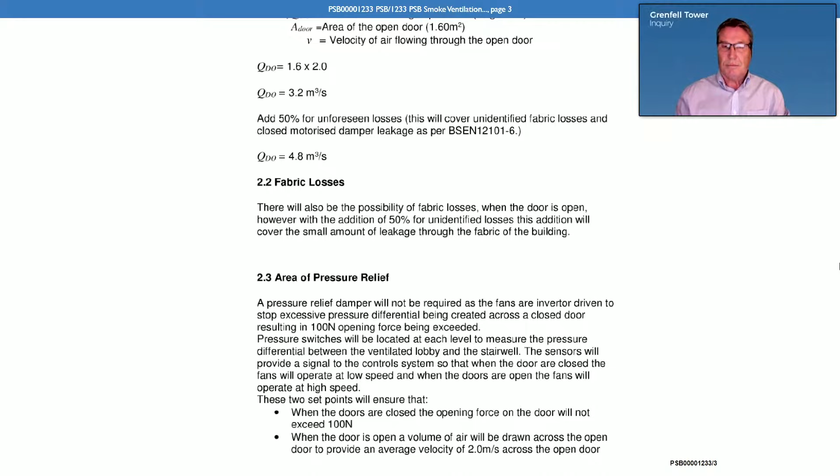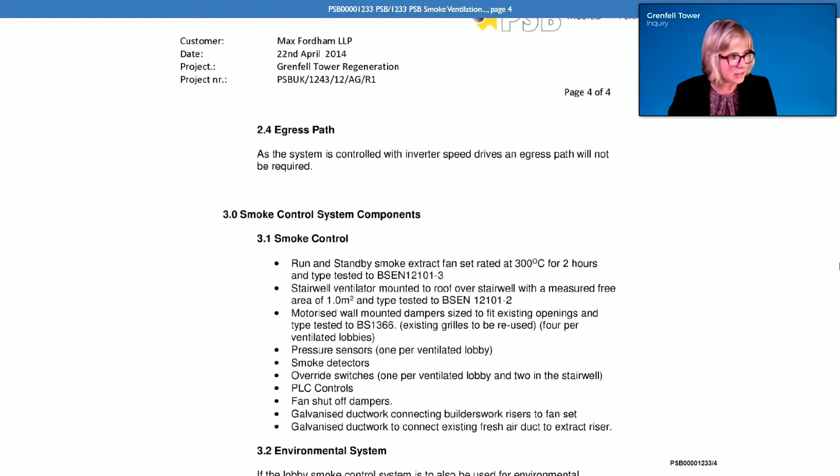And then we can see on page 4 a list of components. We just go over the page. You've just outlined there a draft list of components. And then there's brief mention of the environmental system at the bottom of that page.

Now, if we can now go to the first version of the PSB technical submission for the smoke control system. This is at PSB00000207. We can see from the revision history, it's revision 0. It's got you as the author, HMM again, and it's dated the 12th of November 2014, yes?

Now, again, did you write this technical submission? I did. And is it right, and I think you explained this in your first witness statement at paragraph 36, that you produced all the subsequent revisions of the technical submission except for the final version, revision 6, which was produced just after you left PSB. That's correct.

Now, to what extent did any other staff at PSB input into the design decisions shown in this technical submission? None. And what was the purpose of this technical submission? Can you help us? This was put together to show what the components would be.

When you say put together to show what the components would be, it's called a technical submission. Does that mean that the entire purpose of this was simply to identify the components? Yes.

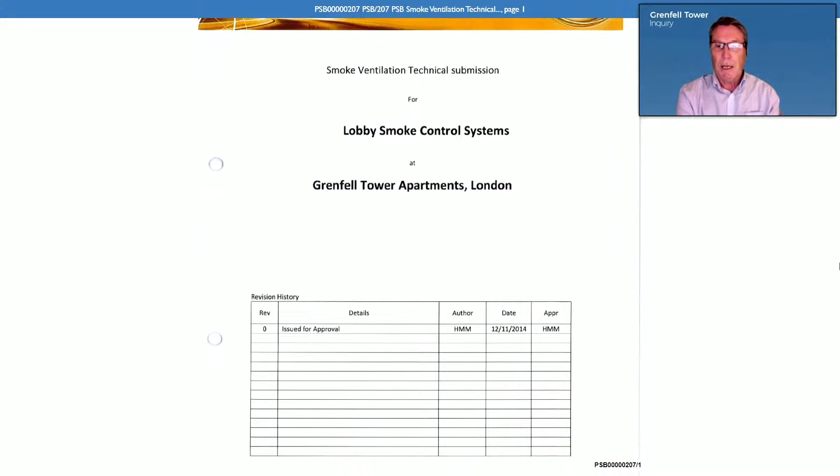So it wasn't supposed to be acting as a full specification for the smoke control system? What do you mean by full specification? Well, identifying the design intent, the objectives of it, and then the facets of the system. There's a brief introduction to the design intent, which is to achieve the ventilation rate. I think there'll be then a reference, can't remember now, to the base document this was based upon, i.e. what influenced this document, and then the components we would use to put a system together.

And is it correct, and we'll go to the text of it in a moment, that this submission was prepared for JS Wright, who were by this time receiving PSB's proposals? Is that correct? It may be, I really can't remember.

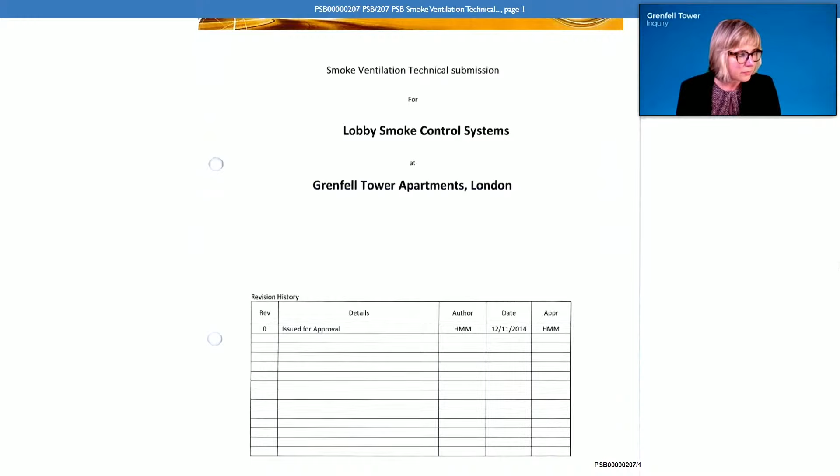And if we look at the very bottom of page 3 and on to page 4, this document has 2 different phases of proposal that it's dealing with. Is it right in general terms that phase 1 was a temporary solution for the existing system and phase 2 was the permanent design of the refurbished system? Going back to your previous question, yes, this was produced for JS Wright. Now I'm reading this, I can see that was the case. Phase 1, we were asked to consider bringing the existing natural vent system to a working status because it was not working, and to implement that as quickly as possible. And then that would then be followed by converting it to a mechanical system. Yes, I understand.

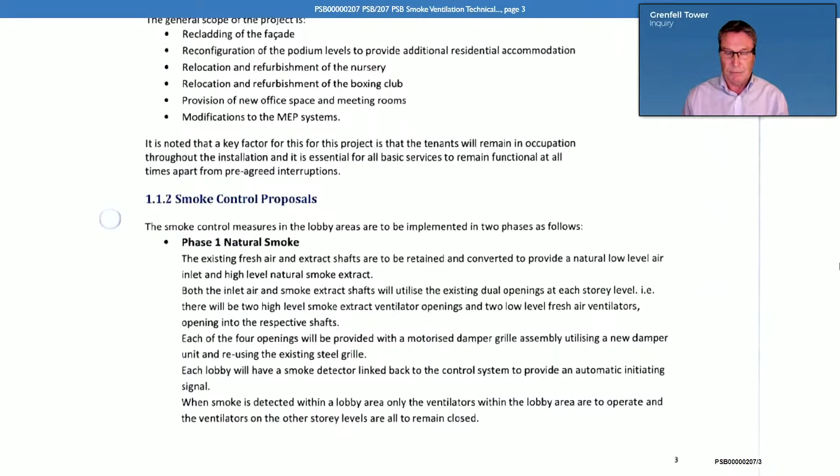And if we go over the page, I think we can see phase 2 is dealt with. Yes. Phase 2 then is the mechanical smoke extract. At a predetermined date, phase 2 will be to implement to convert the system into a fully mechanical extract system with a new smoke extract run, etc.

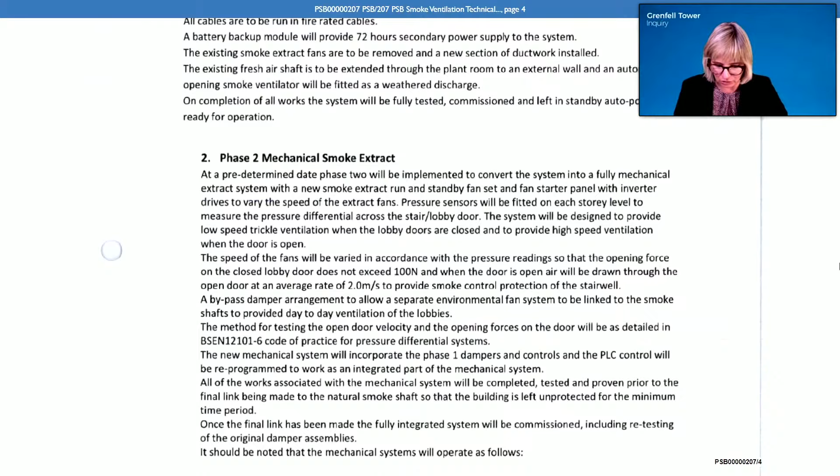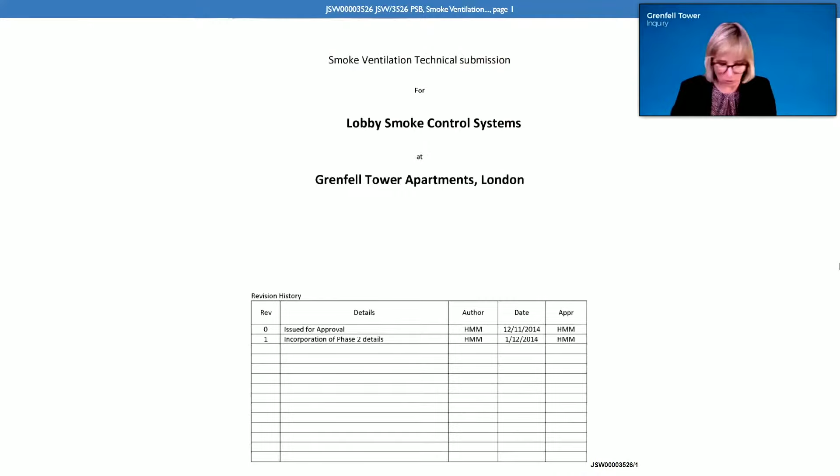Now, let's actually look now at the second version of this proposal, JSW00003526. We can see this one's dated the 1st of December 2014. And again, you were the author of this proposal, yes? Yes. And if we go to page 3 and look at paragraph 1.1.2,

we look at the bottom, we see this about the design intent. It says the final smoke control system has been designed to provide the existing stairwell with protection from the ingress of smoke from a fire within a dwelling by means of a mechanical extract system. The system has been designed to provide an average open door velocity across an open lobby stairwell door of 2 meters per second. This velocity is in accordance with the recommendation for a Class B pressure differential system as defined in that Code of Practice BS-EN 12101 Part 6.

That's correct. And then in the next paragraph, it says this - I think that should mean it should be noted that as the system is designed to extract air from the lobby via the open stairwell door, the system is not designed to comply with all the requirements of the aforementioned Code of Practice. Now, just looking at that paragraph I just read out and the first part of it, what did you mean when you say that the system is designed to extract air from the lobby via the open stairwell door?

That we would be extracting from the lobby and the air would come in from the open stairwell door. Yes, so the replacement air is coming from the open stairwell door, is that correct? That's correct, yes.

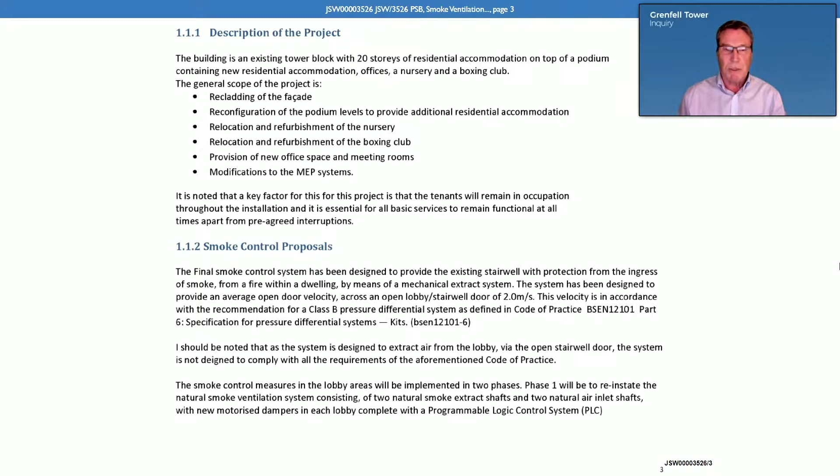It is only the 2 meters a second that we've taken from that standard that is applicable. The rest of the standard does not apply to this system, other than the 100 newtons opening force to a door, because that's general guidance given in other standards as well. So I thought it was prudent to put that in there, so a mistake made by one person would not be made by another. So you wanted to make it clear to everyone reading the proposal that it didn't comply with all of the requirements for a pressure differential system as set out in that code of practice, yes? Correct, yes.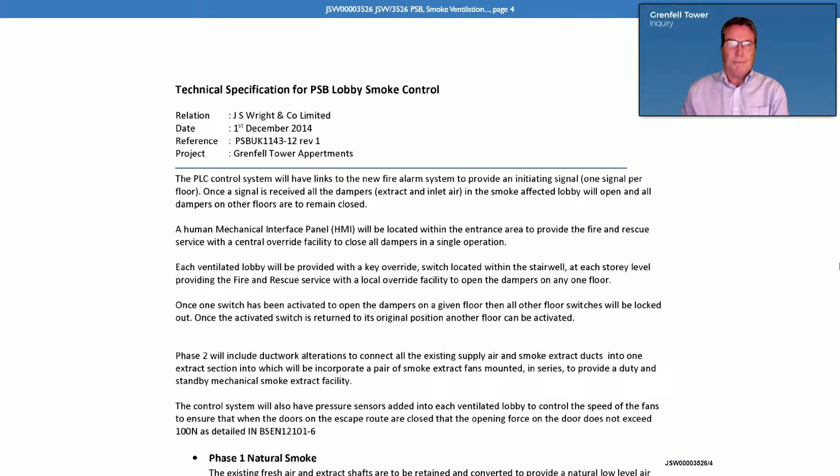And then if we go to page 4, we can see some more details about how the system would be set up. At the top of that page, it says PLC control system. What does PLC stand for? Programmable logic control system, which will have links to the new fire alarm system to provide an initiating signal.

Once the signal is received, all the dampers, extract and inlet air in the smoke-affected lobby will open, and all dampers on other floors are to remain closed. A human mechanical interface panel, HMI, will be located within the entrance area to provide the fire and rescue service with a central override facility to close all dampers in a single operation.

Each ventilated lobby will be provided with a key override, those are the little yellow key override switches we'll look at in due course. A key override switch located within the stairwell at each story level, providing the fire and rescue service with a local override facility to open the dampers on any one floor. Once one switch has been activated to open the dampers on a given floor, all other floor switches will be locked out. Once the activated switch is returned to its original position, another floor can be activated.

So that's explaining what the different components of the system would be and some of the controls. And then if we could also go on to look at page 18. Sorry, actually, I think that must be a wrong reference. I'm looking for section 3.3, where the mechanical function is explained.

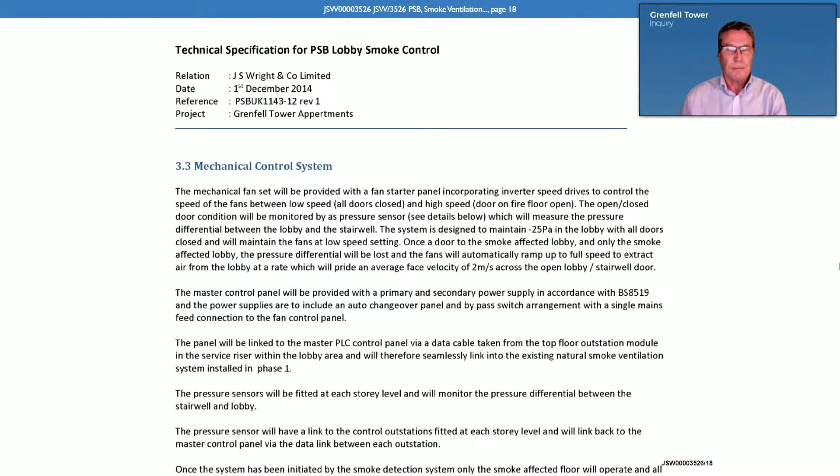Now, is it correct that it was essentially this basic design, the bits that we've just read, that did culminate in the final PSB technical submission, revision 6? I would think so. Yes, that's as we understand it.

So, now can we go to MAX 404665?

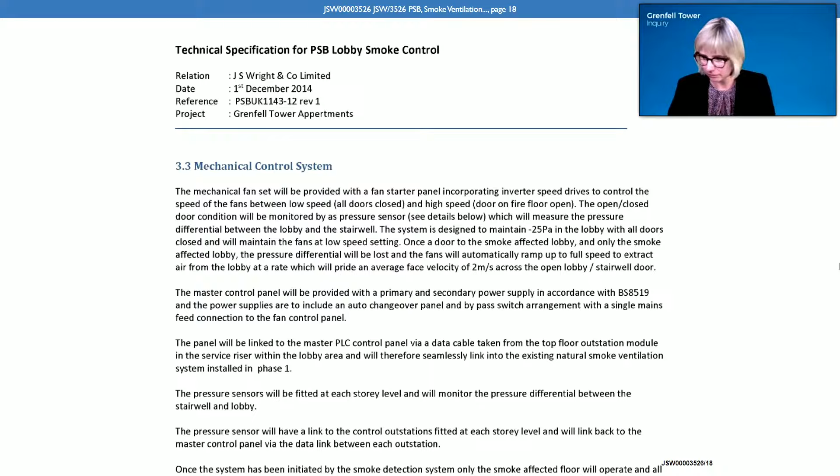MAX 404665. So this is an email from Matt Cross-Smith of Max Fordham to Claire Williams at the TMO. You're not a recipient or copied in here. It's dated the 24th of November 2014. In essence, what this email tells Miss Williams of the TMO is that PSB and JS Wright had been part of a meeting earlier that day with Building Control, Ryden, JS Wright and Studio E all present, and that Building Control had in principle accepted the proposed design.

If we look at the first paragraph, it says, we had a meeting this morning with Building Control regarding this proposed smoke extract system with Ryden, JS Wright, Studio E and the smoke extract system supplier PSB. JS Wright have developed a slightly updated proposal with PSB, which would eliminate the need for the fresh air inlet, which was previously at the top of the glazed foyer. It would instead take the makeup air from a vent at the head of the stair core. We've yet to receive a technical submittal for this, but in principle, it appears to be a neat solution which also satisfies Building Control.

Now, do you recall this meeting on the 24th of November 2014? I recall attending a meeting of that date. I don't recall the detail of it, though. Do you remember Building Control being part of that meeting? Yes, I think it was at their offices.

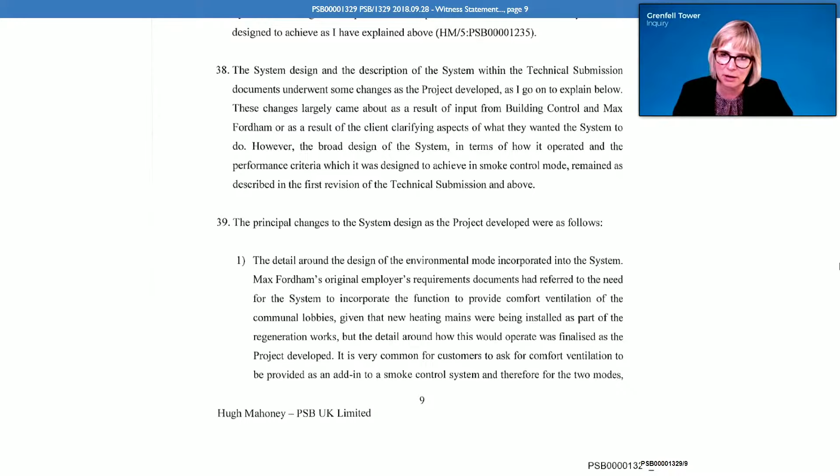Effectively, yes. We would normally have had one damper to isolate that fan set. As it turned out, we needed more than that because we had to isolate that fan set from the system, and then the smoke extract from the environmental system when that was working. So we had additional dampers.

Yes, and I think the thrust of what you're saying is the more dampers you have, the more potential there is for maybe one of those dampers to fail and the system not to operate correctly.

Indeed. Yeah. Now that meant also, it's obvious, that the design for the smoke was to be extracted in the south shaft downwards through the south shaft, the smoke to come down, not to rise up. Yes. In your view, did that fact alone affect the likely performance of the system?

No, it wouldn't. And back to a point, I know it's like I'm splitting hairs. It's not a smoke extract system. We're extracting air, potentially only air, or air and some smoke. So extracting downwards is not a problem. It doesn't give you any additional issues to deal with.

I see. So you didn't think that it might be a problem that once there was smoke in that south shaft, that smoke might rise up in the south shaft rather than get pulled downwards? It wouldn't rise up if you had an extract fan running.

Did you have any concerns about relying on the existing location of the south shaft dampers in the lobby for extracting smoke? We know that those south shaft dampers and the grills for them were at floor level, low level, whereas on the north side, they were higher up on the wall. Did you ever consider that as part of the design process?

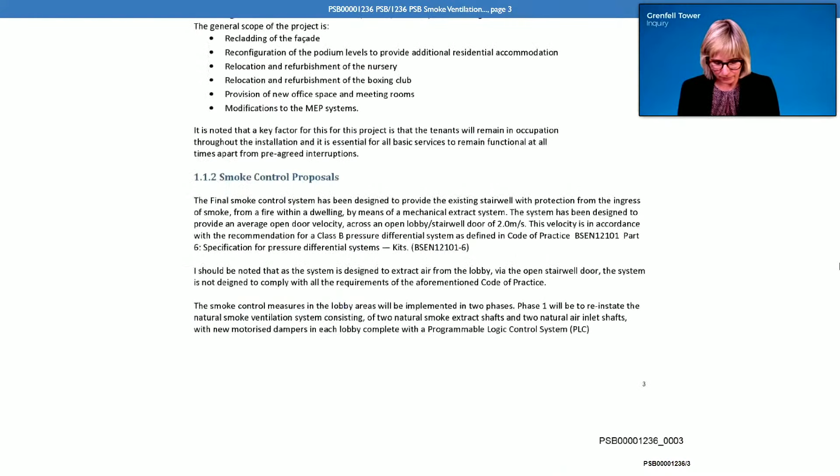And if we look at paragraph 1.1.2 at the bottom of the page, we can see it still says in the second paragraph there, it should be noted that the system is designed to extract air from the lobby, etc., and it's not designed to comply with all the requirements of the aforementioned code of practice. Now, if we go to an email now, PSB 50569.

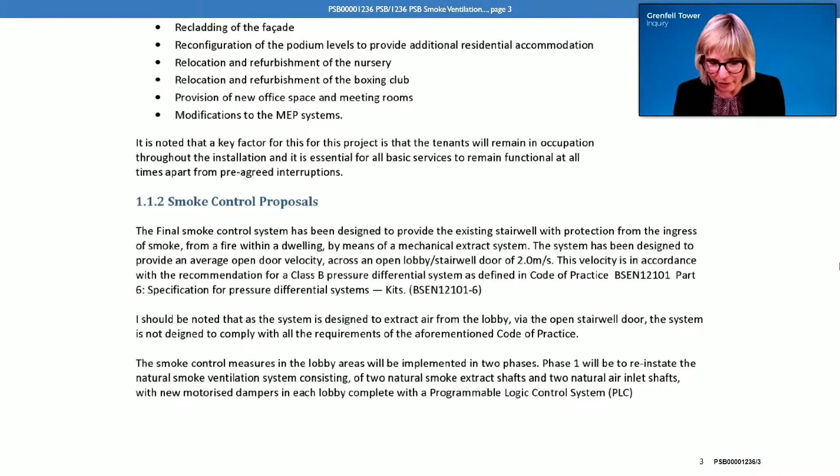Before we go off this particular document, could we go to the top of it, please? Can I show you something that I think is relevant? You mean the top of this page? Particular page, yes. If we look at item 1.1, sub-item 2, specification, Max Fordham Grenfell Tower ventilation analysis revision A dated 6th of May 2014, is the betterment document. So my specification is based upon Max Fordham's betterment document.

I see. Okay, thank you. That's helpful. So if we could go now to an email chain, PSB 50569.

This is an email from David Bradbury within PSB to you on the 11th of June 2015. He says, Paul Hanson from Building Control has just called. Can we let him know ASAP if we mean the statement highlighted in yellow, or can it be deleted and resubmitted?

He wants us to basically delete it as it doesn't tie in with what we've discussed with him. If we can respond quickly, we can avoid him rejecting the technical submission. We can see that he's highlighted that paragraph about what the system's designed to do, and that it's not designed to comply with all the requirements of the aforementioned code of practice. In revision 3 of the technical submission, PSB 50209, that paragraph was then deleted in its entirety and doesn't appear thereafter. Do you recall that? Yes.

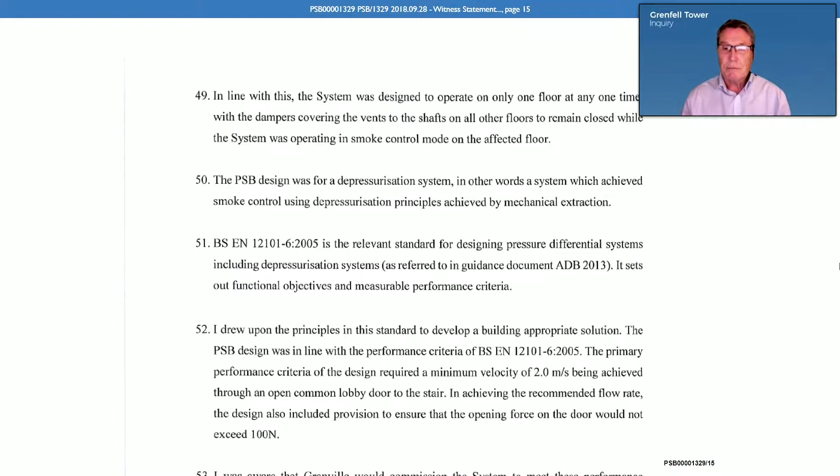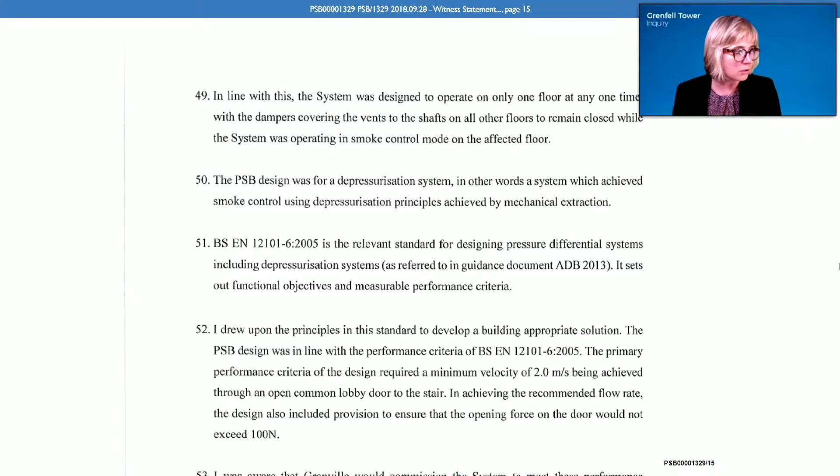So when you told us in your first statement that the PSB design was in line with the performance criteria of BS-EN 12101 Part 6, that was incorrect, wasn't it? That is incorrect. Yeah. And at paragraph 54, you told us achieving the functional objectives of that British standard indicates compliance with the functional requirements of the building regulations.

So you've said the design was in line with that British standard, and achieving the functional objectives of that British standard shows compliance with the building regulations.

No, in line with my design proposal, yes. I beg your pardon? In line with my design proposal. I drew upon the principles in this standard to develop a building appropriate solution. It wasn't following the standard, it was an appropriate solution.

Yes, and then I said all along you couldn't put it in, so we've developed an alternative design solution because nothing else would go in.

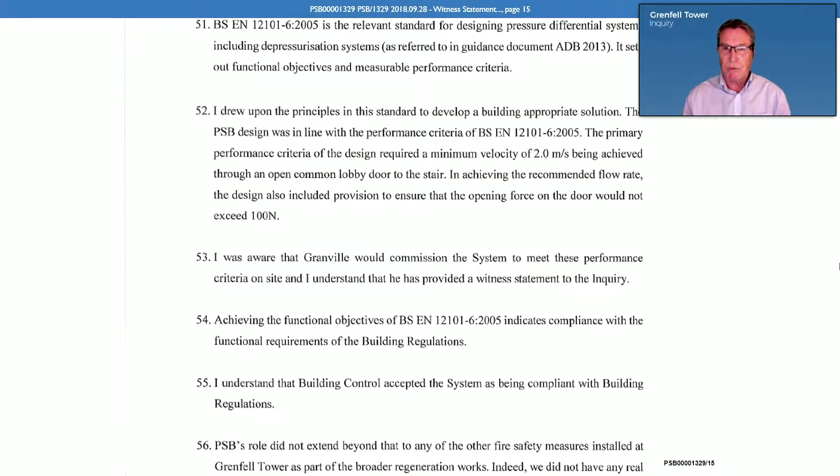Well, if we can look at your second statement to the inquiry at page 7, picking it up at paragraph 36. In your second statement that we received this year, you say mechanical extract systems which create a depressurized adjacent space, in this case the lobby, resulting in an induced airflow across the open door, can be referred to as depressurization systems.

Correct. And then below that, you say these types of systems should not, however, be confused with pressure differential systems, which are designed to comply with all of the requirements of that standard. Correct. And then at paragraphs 39 and 40,

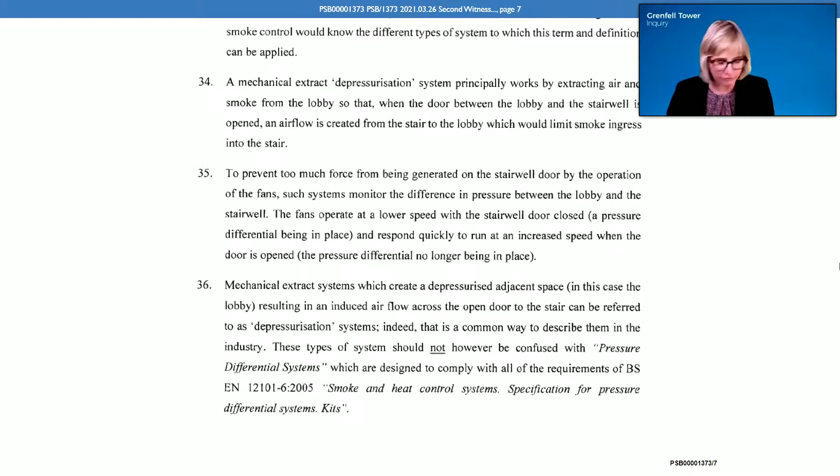if we go over the page, you say a decision had been made, this is 39, before PSB were instructed to make use of the existing shafts. It was not possible to make the shafts any bigger or install new shafts. I was therefore asked to design a system which reused the existing shafts, etc.

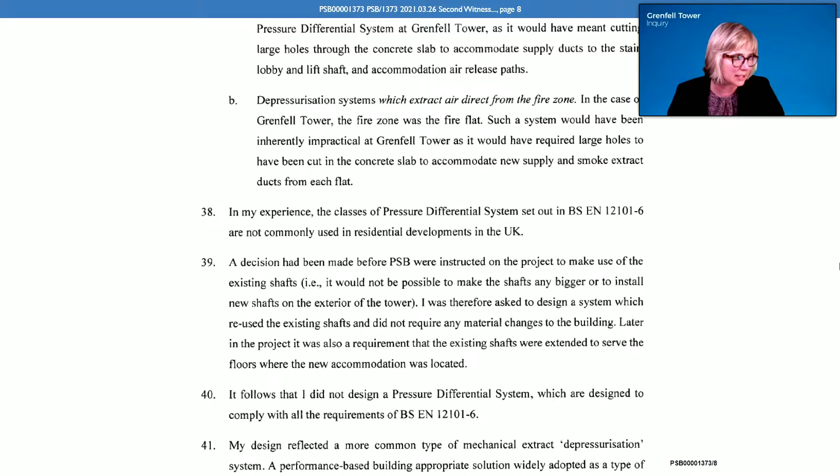And then you say at 40, it follows that I did not design a pressure differential system, which are designed to comply with all the requirements of that standard. Mm-hmm.

Now, can you just explain how you came to say in your first witness statement that the design was in line with the performance criteria of that standard, but then you've told us in your second statement that you did not design a system which complied with all the requirements of that standard?

As I said, that's not what I said. That full stop was in the wrong place. It was the 2 meter a second I was referring to. And I'd made the statement that we used it to develop a system type. It wasn't following it. It was designed, we used it to come up with a different solution.

Can you explain why you didn't make that clear in your first statement to the inquiry, that you hadn't adopted all the performance criteria of that standard and that you'd adopted what you call a building appropriate solution?

No, I can't. What was it that prompted you to serve that second statement on the inquiry some 2.5 years after your first statement? Did you suddenly realise that the first statement could be read as suggesting you'd complied with that British standard when in fact you hadn't?

It could be read that way, yes. But there are other things that have occurred since then and now.

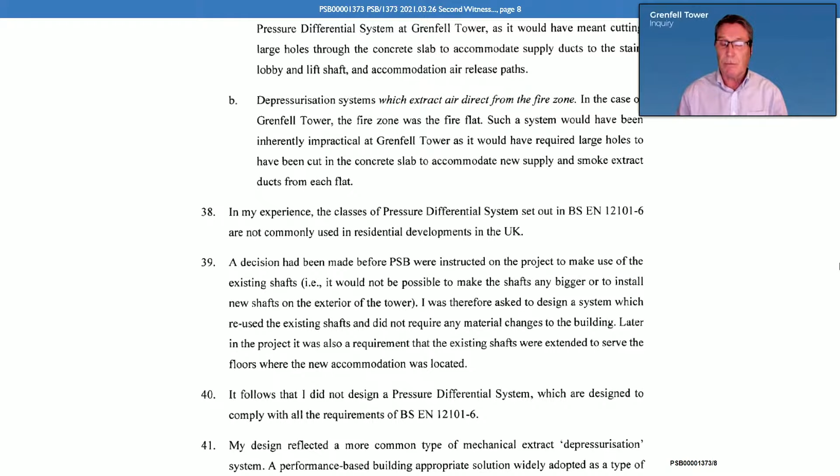But was that one of the reasons why you chose to serve a further statement in order to clarify that point? I'm not sure that was my intent.